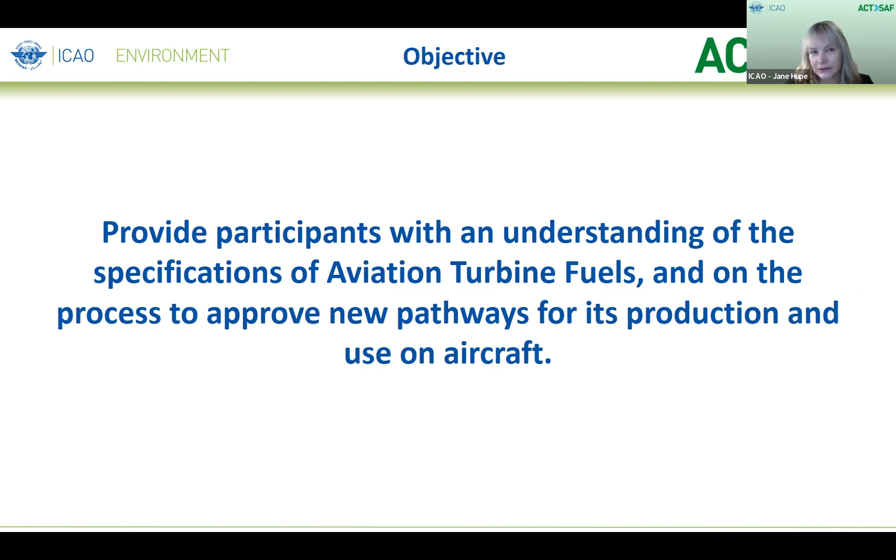Today, we are very pleased to count on the expertise of three ACT-SAF partners: Mr. Ross Walker from Airbus, Mr. Mark Rumizen from the US Federal Aviation Administration, and Mr. Nicolas Jeuland from Safran. They have very kindly volunteered to share their knowledge, expertise, and experience with states as part of the ACT-SAF series. A big thank you for your cooperation.

It is a pleasure, really a pleasure having you here today. I hope you will make full use of this session to ask questions, to clarify matters pertaining to SAF production and certification, and related issues. And we really encourage every participant to make today's training as interactive as possible.

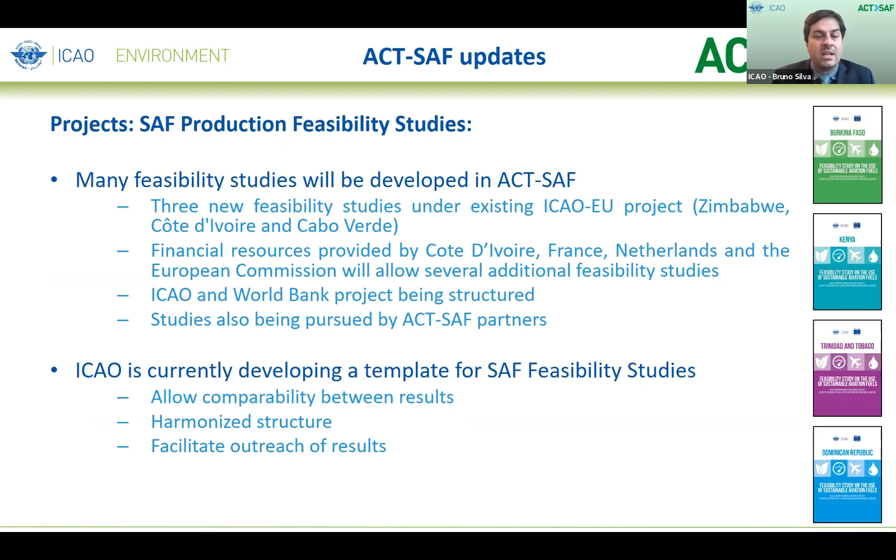So very soon we'll have a lot of feasibility studies coming to be developed and published in the near term. So what we are also doing now is to develop a template for these feasibility studies so that we facilitate the comparability between the results, so we can compare results between different feasibility studies. It will also facilitate the outreach of the results so that people know where to find information on these feasibility studies, and with a harmonized structure this is going to be facilitated.

We also received some feedback that people wanted more details on what will be the projects following the feasibility studies. So we always start with the feasibility study to check if it's feasible to develop a SAF industry in a state. But after that, we're also foreseeing projects to support policy implementation, as there are many policies available to support SAF development.

So here are some categories that we have listed in our ICAO guidance on potential policies and coordinated approaches for the development and deployment of sustainable aviation fuel. And there is this question: what is the best policy for a specific state situation? We will support states to identify the best solution in terms of policy, and also support states to implement a policy framework if that's the case.

Next slide please. Once again, once we've identified the feasibility of SAF production in a state, reminding of the ACT-SAF series where we talked about sustainability: all the elements of a SAF supply chain need to be certified, from the feedstock production from the farms and the distribution of the feedstock, the SAF production plant or refinery, and up to the SAF blending point. Everything needs to be certified under CORSIA standards.

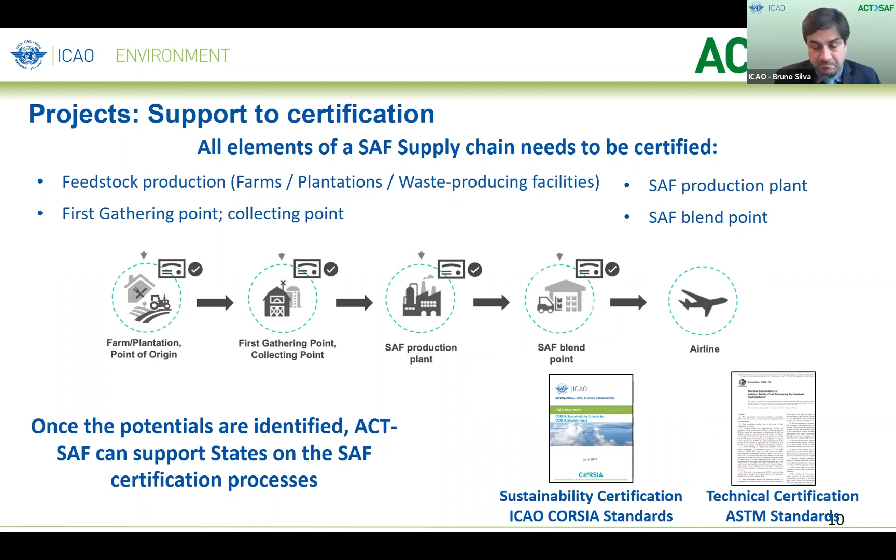Again, a key request we have received since the beginning is the conceptual training on SAF. So on today's session we will talk about SAF production technology and certification. This will complement what we had in the last series, where we talked about sustainability certification. Today we'll really go into the technical certification, how to ensure that the technologies to produce SAF are safe for use in aircraft.

So with that, next slide. I would like to hand over the floor to our first speaker, Mr. Ross Walker from Airbus, who will start on these four first items of the agenda: aviation fuel terms and acronyms, what is aviation turbine fuel, how is aviation turbine fuel produced and controlled, and we'll provide an overview of aviation industry processes for assessing, controlling and approving new feedstocks and processes for aviation turbine fuel production. So Ross, the floor is yours.

Okay, thank you very much, Bruno. I'm Ross Walker, I work for Airbus. I've been working on fuel specifications for about 30 years now, and I will try to impart some of the information I have. Next slide please.

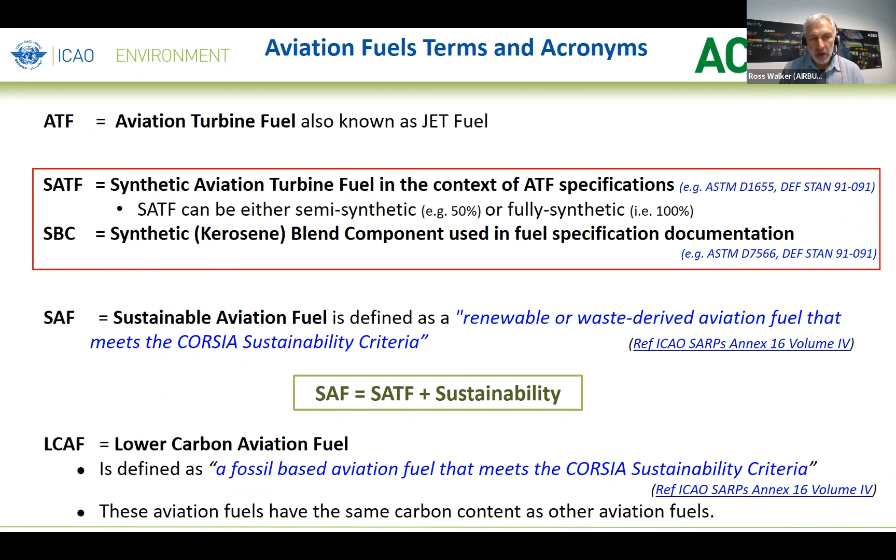SAF is a term that's often used for sustainable aviation fuels, and the sustainable synthetic aviation turbine fuel can be SAF. And in ICAO, you also have the low carbon aviation fuels. My talk today will be about synthetic aviation turbine fuels and how we ensure they are safe for operations for the aircraft. Next slide please.

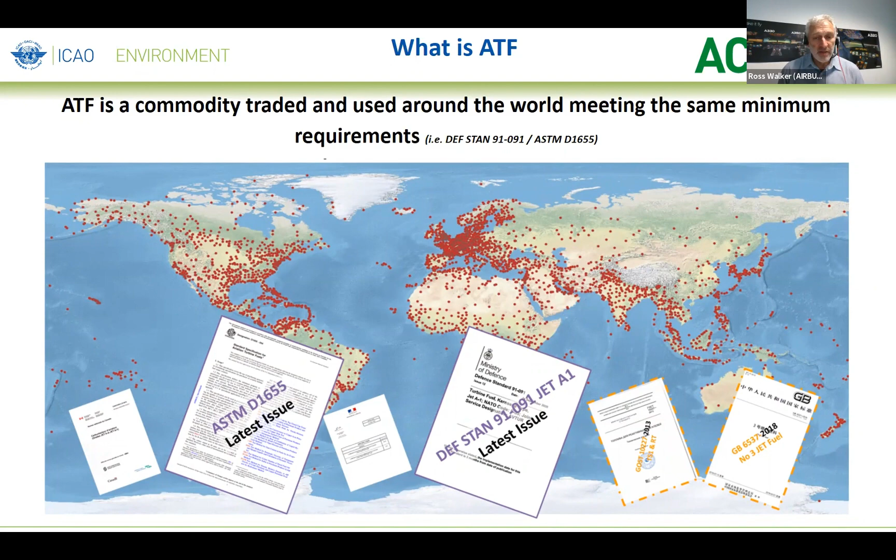So what is ATF? Next slide. So ATF, aviation turbine fuel or jet fuel, is a commodity traded around the world with minimum requirements, and during trading it is basically controlled by two specifications: either ASTM D1655 Jet A fuel and Jet A1 fuel, or DEF STAN 91-091 Jet A1 fuel. These two fuel specifications are the ones which the industry works with, and wherever an aircraft flies around the world it needs to pick up the same fuel. If it picks up a fuel that is different, that can affect the safety and the operation of the aircraft. Next slide please.

Aviation turbine fuel is a hydrocarbon in the C9 to C16 range. It doesn't have a precise chemical composition. It's primarily distilled crude oil, composed of paraffins, naphthenes, and aromatics. I put aromatics in a red box because that's one of the subjects we have to deal with when synthesizing fuels, since not all synthesis means will produce aromatics, and as I'll explain later, they are required for aviation fuels.

On the right, you see a table listing requirements we check for each batch of fuel. But if we go to the next slide, please.

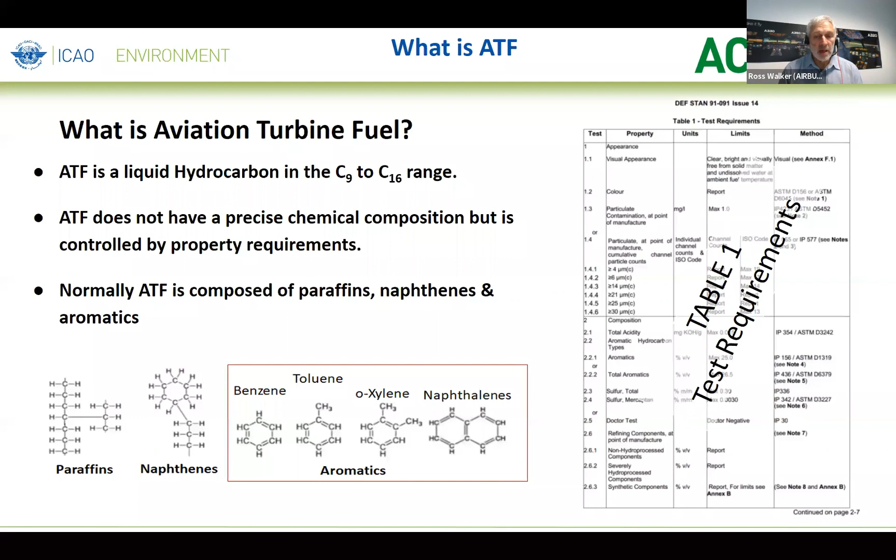The list of properties we check is not everything we require within jet fuel. Many properties, such as specific energy, density, and volatility, are things we can check. But other properties within jet fuel made from petroleum sources are what we call inherent. They are there because it has been produced in a set way for many years, and we know the electrical permittivity of the fuel will be within a certain range, which is critical for fuel gauging. There are other inherent properties important for the safety and security of the aircraft that we don't actually measure, but are there because of the production processes we use.

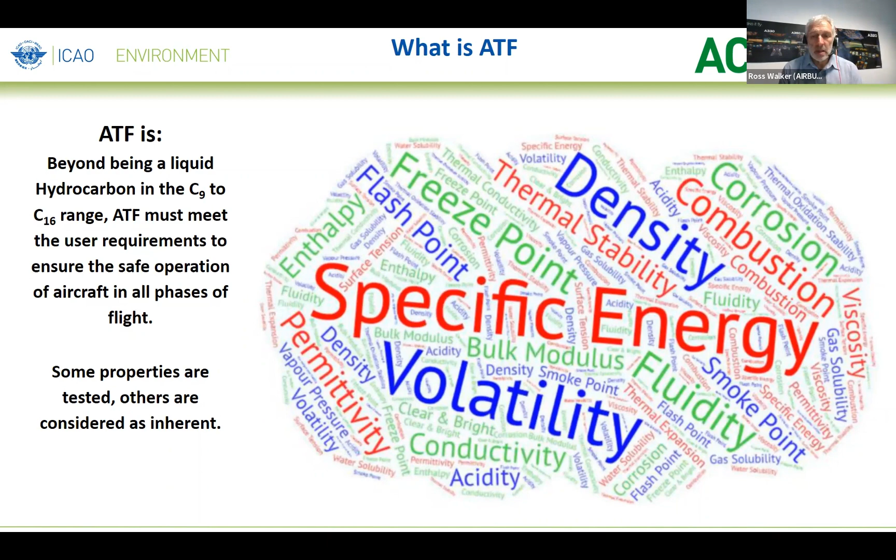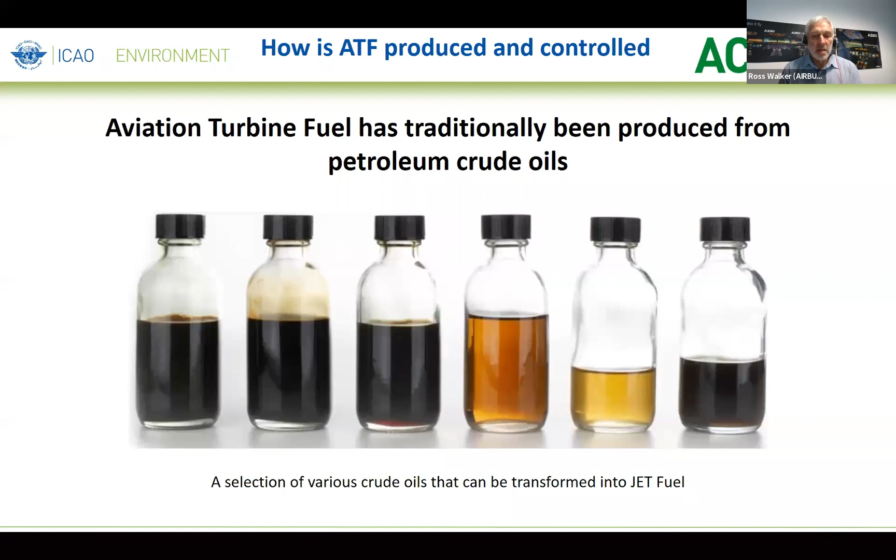Now I'd like to talk about how we produce jet fuels. We all know jet fuel is produced from petroleum and crude oils, but not all crude oils are the same. You can see here visually that these are six different crude oils, and they visually look different. But they all can be used to produce jet fuels.

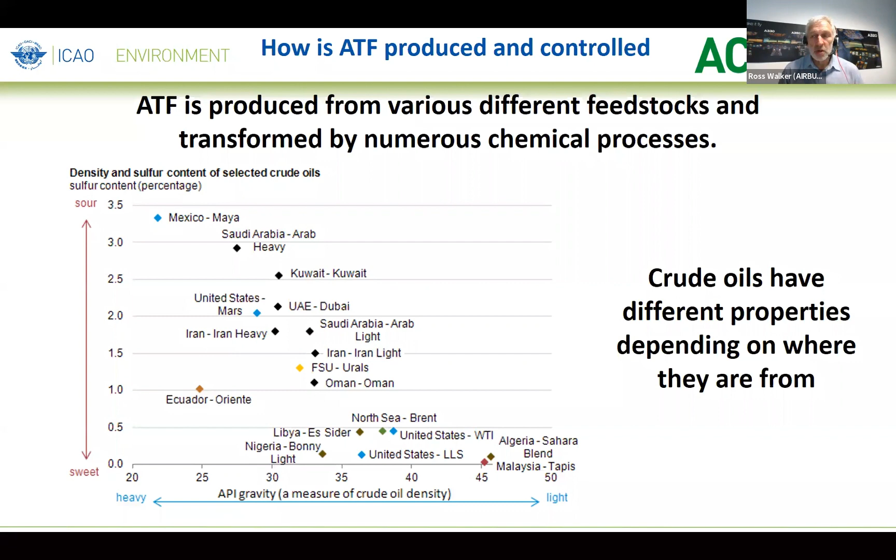So there are lots of different processes used. If we look at the next slide, we can see that if we did a straight distillation - that's just putting the fuel into a distillery, which would heat up the liquids, and the vapors would be taken off at different temperatures depending on the origin of the crude oil, how thick it is, the viscosity, what its sulfur content is - we would get different products out.

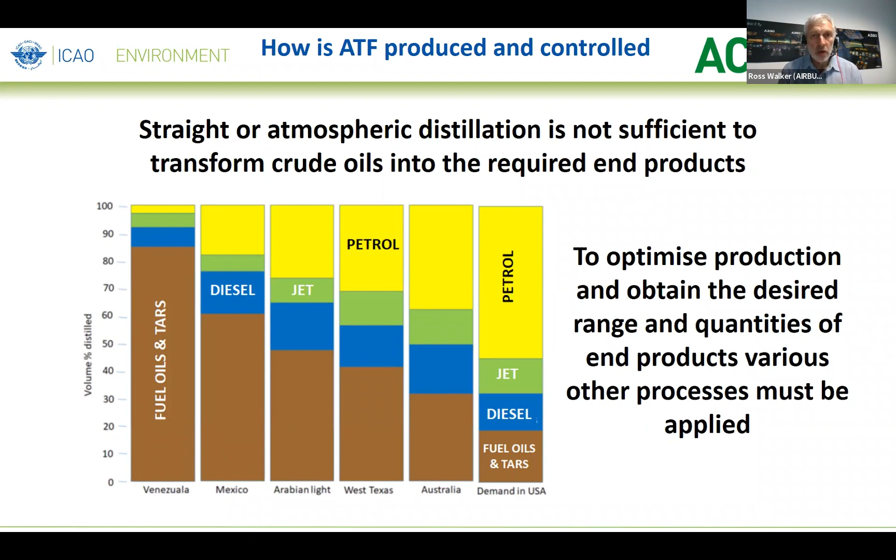So if we go to the next slide, I'm still talking about crude oil, not about fuels which could be substantially sustainable from renewable sources. This is crude oil production, and you can see there are multiple pathways we use to break down different components and reassemble them within the hydrocarbons to make the products we need. I picked out on the right-hand side two aviation fuels, avgas and aviation jet fuel - aviation jet fuel is what we're talking about today. These products can be made by multiple processes, even from petroleum sources.

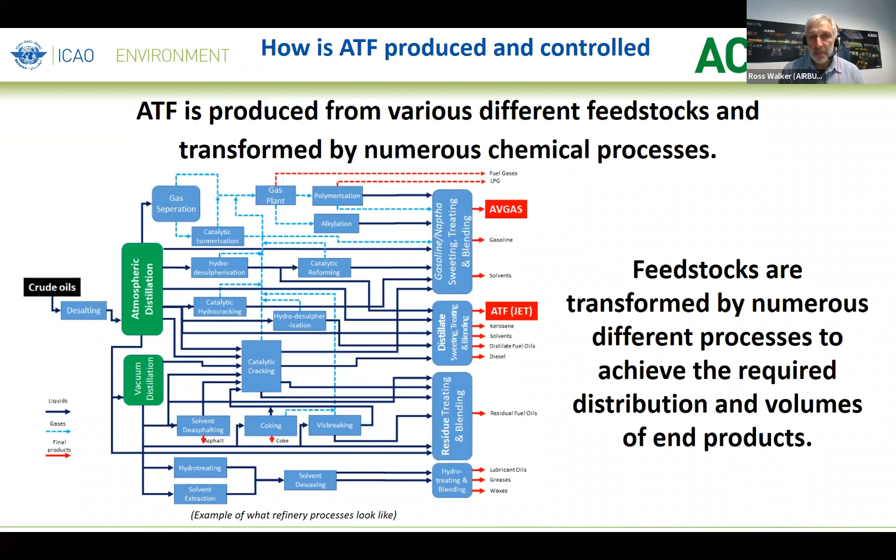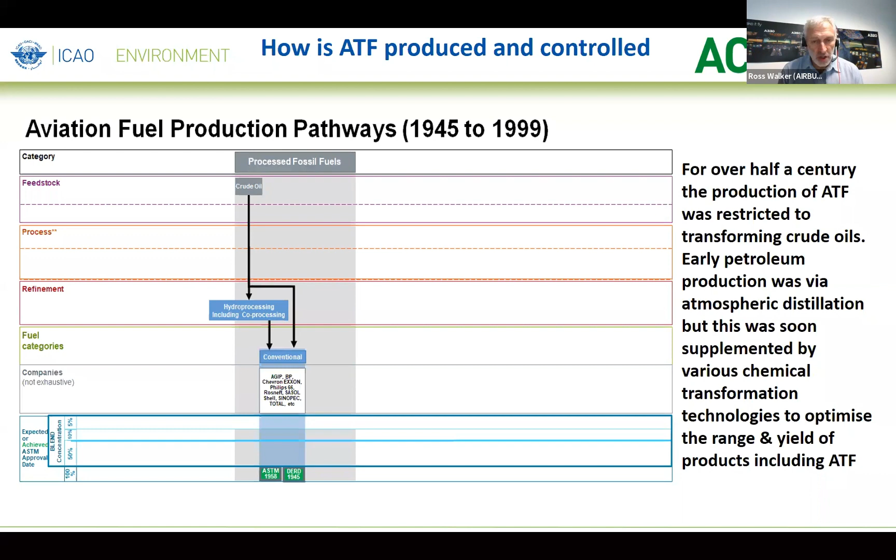So synthesizing fuels is something we have done for a significant period of time and have safely produced jet fuels this way. As I say, we've been producing fuels either by straight distillation or by hydroprocessing - or synthesizing, another way of saying that - since 1945 to 1999, and always using petroleum fuels. In 1999, there was a major change in that we allowed the production of jet fuels from non-petroleum sources. This was done through a process called Fischer-Tropsch.

It took about 5 or 6 years of very intense investigation and study by the producer of the fuel, in collaboration with all the airframers and engine manufacturers, to verify that this new production method was fit for purpose and would not affect the operation of the aircraft.

But the fuel that came out at the end is a jet fuel, a Jet A or Jet A1 fuel. It was limited to a 50% blend with existing petroleum at that time, due to concerns about certain properties, one of those being the aromatics, which is important for the functioning of fuel gauging systems and some of the joints and seals on the aircraft.

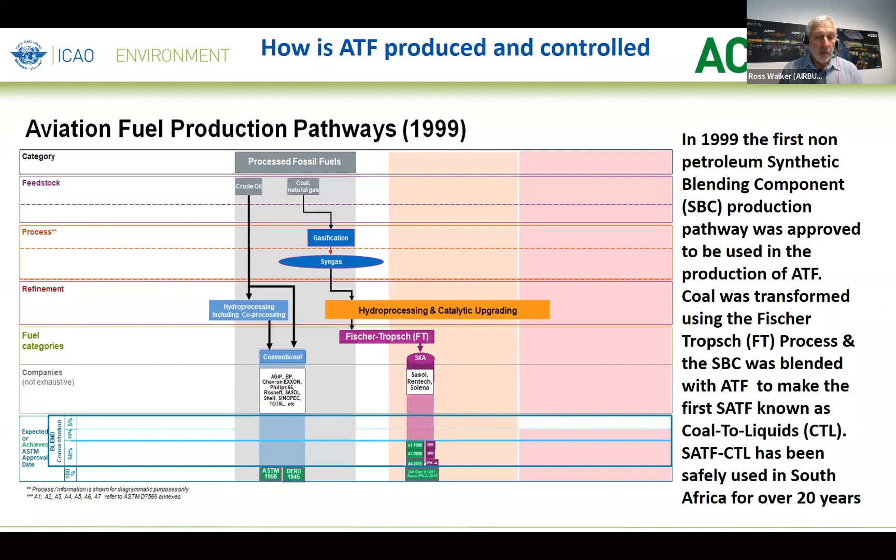When we got to 2009, we'd already approved 100% synthetic fuel using the Fischer-Tropsch process, but it was restricted to one specific refinery in South Africa and was not generally available for producing fuels in that way.

This was a catalyst to us formalizing more precisely the process for approving fuels, a process we call ASTM D4054, and also another means of documenting the approval process. Rather than cluttering up the existing specification with lots of different approvals, we created a brand new specification called ASTM D7566, and within that specification we started putting annexes in.

The first one was the Fischer-Tropsch process, which was expanded beyond production in South Africa to a wider approval that can use various means of production, going from existing fossil sources such as coal or natural gas, but also to renewable biomass, which could be sustainable.

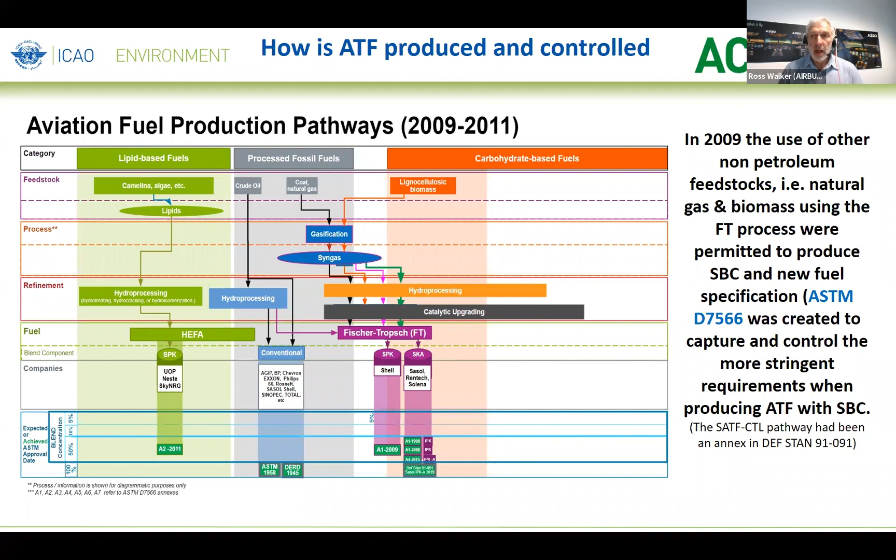In 2011, we approved the second annex, which is a HEFA fuel, hydroprocessed esters and fatty acids, which is probably the one that's been most used. Sometimes used cooking oil is transformed in this way to produce fuels. So in 2011, we'd gone from 2 pathways to 3, and here's where we are today.

I won't talk through all these different processes, but you can see there are multiple different feedstocks we can use, from sugars, starches, vegetable oils, to transform into jet fuel.

Now, all these fuels today that are synthesized from non-petroleum sources require that we blend them. This blending is to ensure we have the correct aromatic content, and also gives us confidence that the final fuel is the same as existing Jet A and Jet A1 fuel. All these fuels are certified as Jet A and Jet A1 fuel based on 2 key specifications, ASTM D1655 and DEF STAN 91-091.

It is important that the final product is a fuel that is listed in the aircraft documentation and certified by the airworthiness authorities as fit for purpose for the aircraft, to ensure the safety of the aircraft and operations. That is the purpose of the specification: safety and operation of the aircraft.

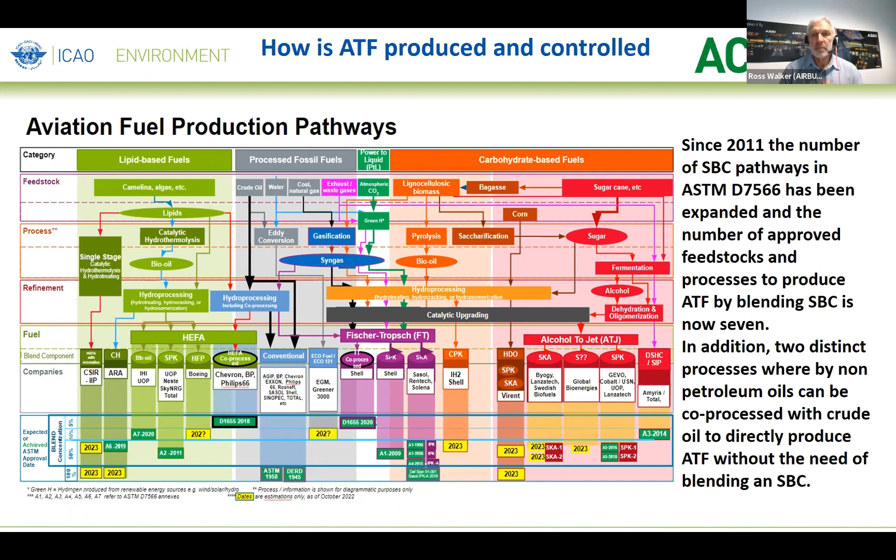If we go to the next slide, this is something you can look at later, or you can go to the actual document, ASTM D7566, which will list the 7 pathways we have now approved for use to produce Jet A and Jet A1 fuel.

There are also 2 other methods to produce fuel, directly within the 2 specifications I mentioned, that allow you to blend non-petroleum oils, such as vegetable oils, with crude oil at the initial point of production. They then go into the normal production process to produce Jet A and Jet A1 fuel without a blending requirement. But normally there is a restriction at present of around 5% of vegetable or non-petroleum oils to make those fuels.

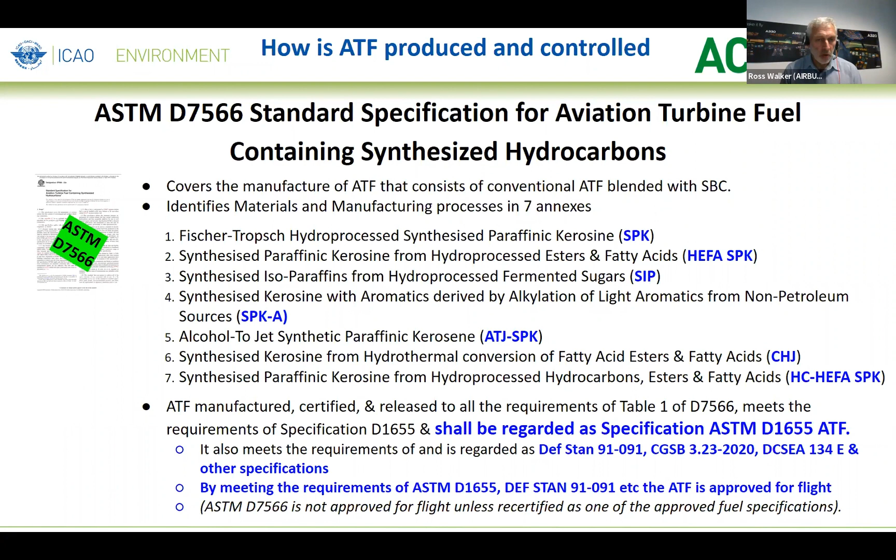If we go to the next slide, this slide is trying to explain what I mean by blending and why we have the requirement for blending. The top wiggly line is showing the hydrocarbon distribution of a Jet A1 fuel produced from a petroleum source, 100% petroleum.

The bottom green line is one of the fuels we use that is derived from vegetable matter and synthesized, a synthesized blend component. We call it a blend component at this time, not a SAF or sustainable aviation fuel, because it's not certified for use on the aircraft.

But if we blend the green line with the blue line, we end up with the red line, and that is a synthetic aviation turbine fuel. If you compare the red line with the blue line, they are very similar, whereas the green line has a significant difference to the blue line. One of those key components, as I mentioned, is the aromatics. Aromatics are something we've always controlled in jet fuel.

We've always limited what the maximum level of jet aromatics is within jet fuel. But we know that because it's inherent within jet fuel production from petroleum sources, we've never had to put a minimum value in. But when we produce fuels from synthetic processes, not all processes produce aromatics. Therefore, we've had to put in place a requirement that there is a minimum aromatic content within jet fuels made from non-petroleum sources. This is a key criteria that limits how much we can actually use sustainable or synthetic feedstocks to produce jet fuel. The actual blending ratios are specified in the ASTM D7566 document because they will vary depending on which feedstock and which process you are using to produce the fuels.

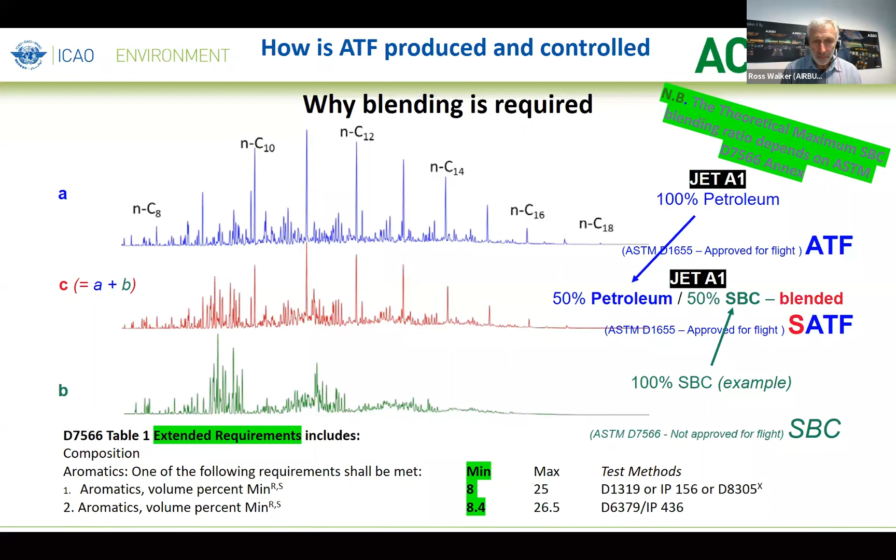If we go to the next slide, I'll give you an overview of where we are today. So what I was talking about is how we produce normal petroleum-derived fuels through varied processes. We actually break down and synthesize much of the petroleum jet fuel that we have today. But when we go to synthesizing fuels from non-petroleum sources, we have to have a very clear and precise process, ASTM D4054. Mark Rumizen, in the next part of this presentation, will explain clearly what that process is, who's involved, and how we achieve certification through that process.

A second document I mentioned was the D7566. This is a document which allows us to categorize and define precisely each process in the form of annexes within this document. As I said, there are 7 annexes, allowing 7 different pathways which enable you to produce potentially not just synthetic fuels, but synthetic fuels that could be sustainable. But neither of these documents are approved for flight.

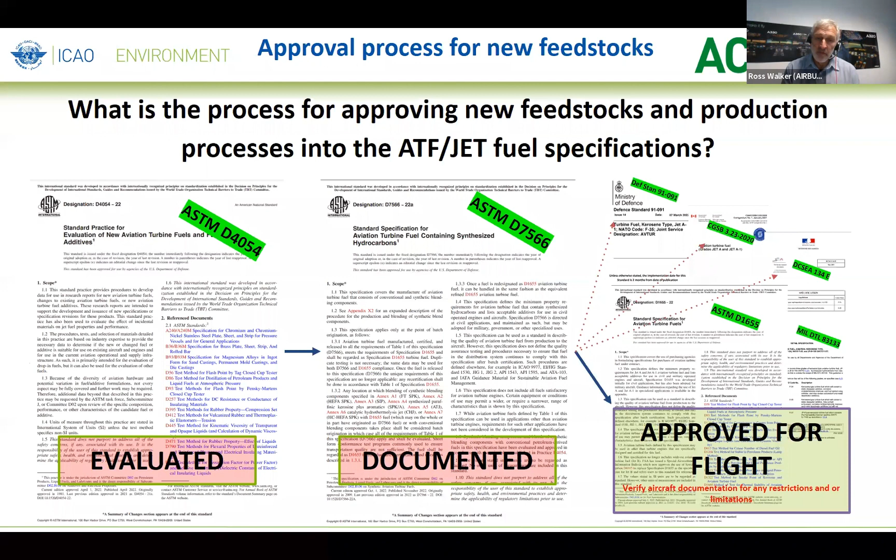The D7566 fuel needs to be recertified as either ASTM D1655 or DEFSTAN 91091, which are listed in aircraft flight documentation, not just for Airbus, but for other aircraft producers such as Boeing, Bombardier, Embraer. Only at this point is it approved for flight, and it's based purely on the safety requirements for the aircraft that approval is given. So that was a very rapid explanation of what jet fuel is, how we synthesize, or the options we have for synthesizing jet fuel from non-petroleum sources, which could potentially be sustainable. I think now Mark Rumizen will explain later more precisely the 2 documents there in red, the 4054 and 7566 documents. If you have any questions, I'm open to take them.

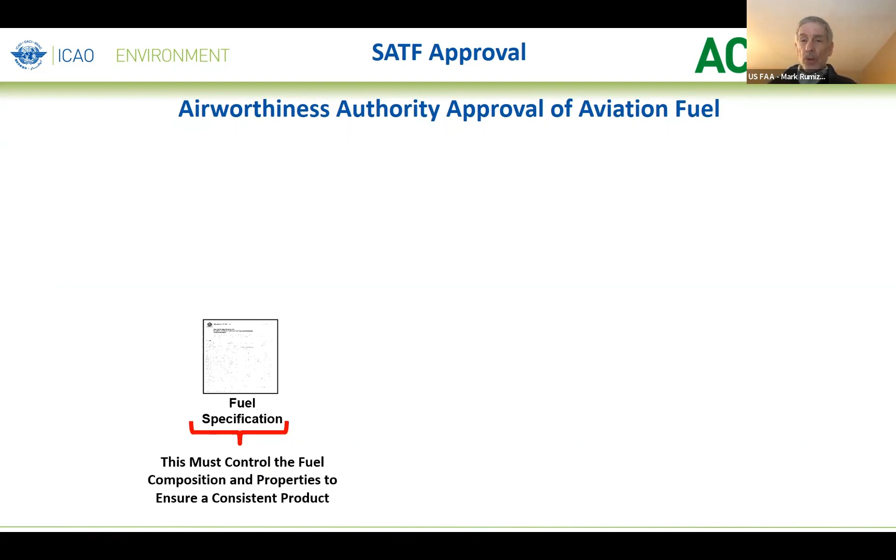Next slide, please. So the way we control fuel, and this is very important, is by a fuel specification, which are typically industry documents. They're also military documents. But there are different specifications, and they're all controlling what we call Jet A or Jet A1 fuel. It's the same fuel. So we control fuel with a fuel specification.

The aircraft engine companies, such as Pratt & Whitney, Rolls-Royce, or GE, include the fuel definition or fuel specification as an operating limitation. And then that operating limitation flows up to the aircraft operating limitations.

So as part of the aircraft design, there's a limitation that says you must use Jet A or Jet A1 fuel in very simple terms. It may define properties or the specification, but really all it says is you must use Jet A or Jet A1 fuel. This is done during certification of the engine and aircraft.

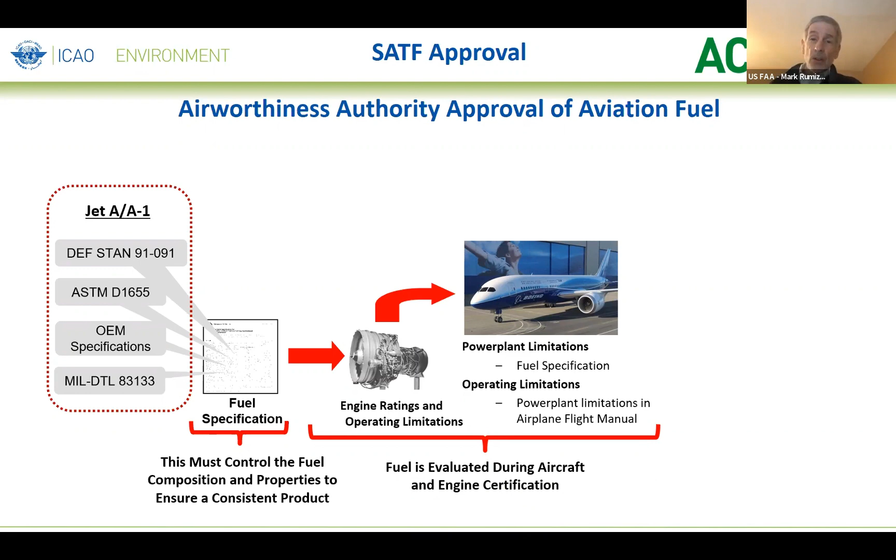And then you send the aircraft out to airlines. The airlines, in accordance with regulations from EASA, Transport Canada, and the FAA, can only use the fuel that the airplane and engine manufacturers say they must use. That's called an operating limitation.

So what this means, if you look at this whole picture, is that the airworthiness authorities — FAA, EASA, Transport Canada, ANAC in Brazil, JCAB in Japan — we don't certify fuel as a product. We don't certify fuel as a part of the airplane. We certify airplanes and engines to operate on a specified fuel. And that's very important. That drives a lot of things I'm going to talk about in the next couple slides.

It's important to note that the airline is where the airworthiness authorities apply their regulatory oversight. They go to the airline and say, are you sure you're only using the fuel that Airbus or Boeing says you're supposed to use? But nothing upstream of that, where the fuel is made, how it's handled, quality checks — none of that is under the oversight of the aviation regulatory authorities. Again, something that is very difficult to understand.

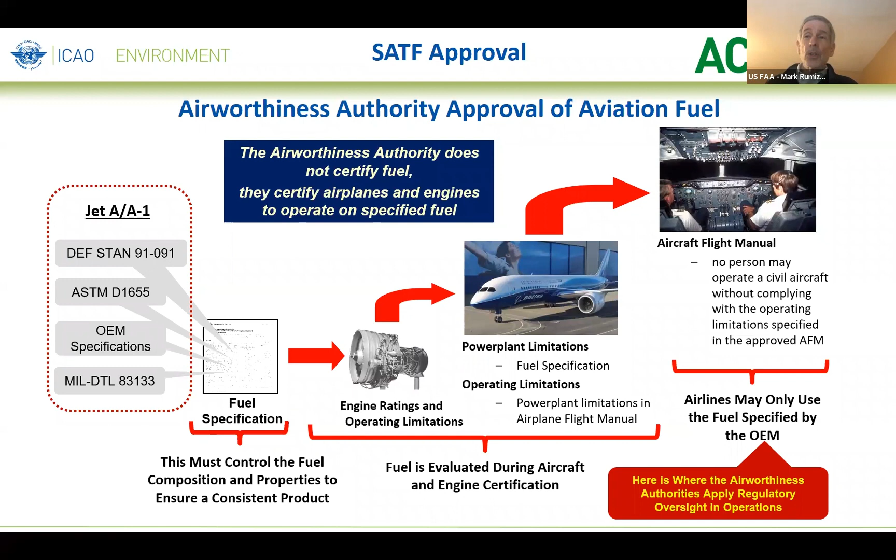So this all ties into how we approve these fuels. Ross already gave you the definition for SATF, synthetic aviation turbine fuels. Notice I'm not using SAF here — I'm saying SATF because not all SATFs are SAFs, but all SAFs are SATF.

Anyway, so we start off with block one. As I just talked about, all the airplanes are approved to operate on Jet A fuel or Jet A1 fuel. That's their operating limitation. But they're all approved to operate on the same fuel.

So what we did when we were trying to figure out a way to evaluate SAFs or SATFs, we developed a process defined by an ASTM standard, D4054. That's our evaluation process. It tells you what tests you need to conduct, with a lot of other information in it.

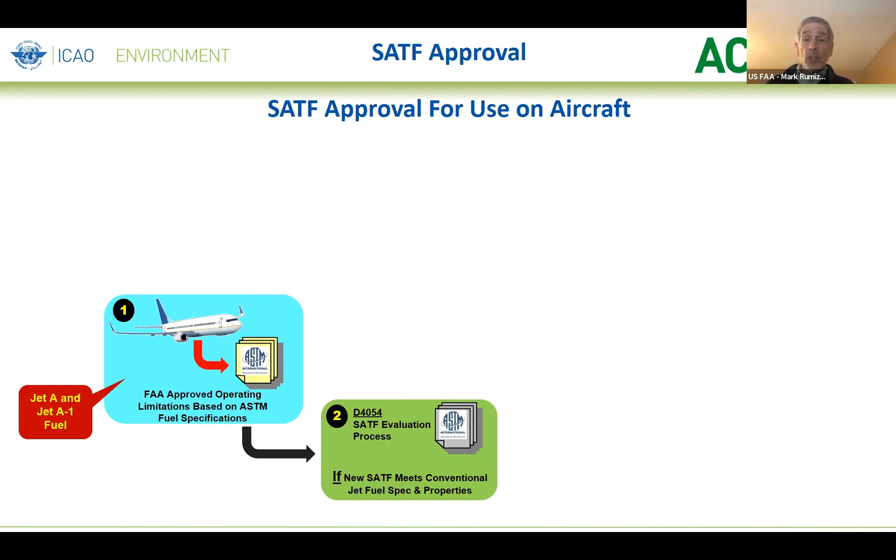And really all that document is trying to do is compare the fuel made from, let's say, renewable resources like sugar or vegetable oils, to see whether or not that fuel is essentially identical to jet fuel made from petroleum. That's what that process is trying to do.

And if the determination or conclusion is — and this is done with the aircraft and engine manufacturers, it's a very rigorous process, I'll explain that in the next slide — but if a determination is made by the aviation fuel community in general, all the stakeholders, that yes, it is the same fuel, then we add it to our drop-in fuel specification, which is ASTM D7566.

And as Ross mentioned, we add these as annexes because right now we require blending with conventional jet fuel to get a complete jet fuel. These are subsets of jet fuel for the most part, and I'll explain that again later.

Yeah, okay, good, my timer's going. Next, please.

And what we call the fuel products defined in the annexes, we call them synthetic blend components, SBCs. I think Ross also mentioned that. Thank you, Ross.

And then you blend it. I just talked about this — that's how you make SATF.

Ross also mentioned how many years he's worked in aviation fuel, and you notice I skipped that part. I don't want to admit that part, but I'll just say it's almost as long as Ross. So I know almost as much as he does.

So moving from block 3 to block 4 — since we've already proven the fuel is Jet A fuel, it's just Jet A fuel. It's determined it's equivalent to the conventional jet fuel specification, because it's equivalent, and there's wording in both specs to sort of lock that in.

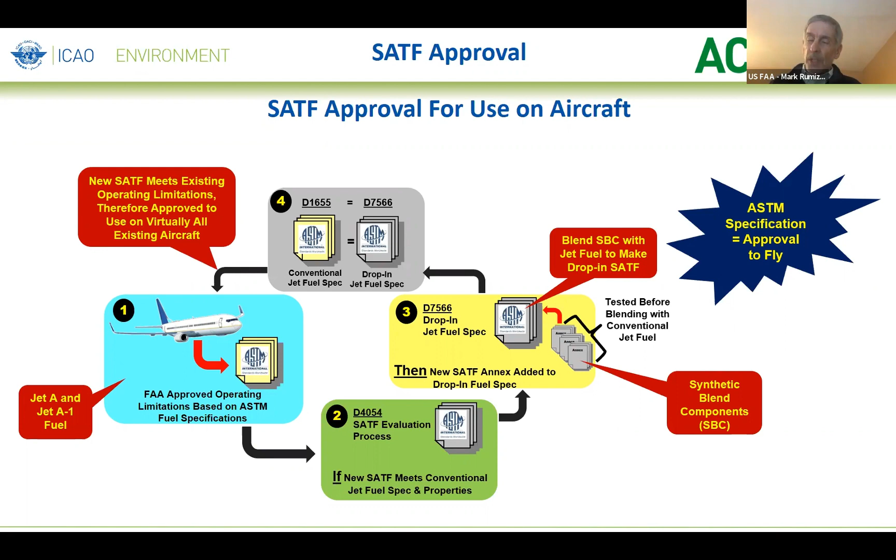But that's it — that's why you hear so many companies talk about getting ASTM approval. It's not really ASTM approval. It's really getting their own ASTM specification annex.

So let's focus on the evaluation process, because that's really the heart of this whole process I talked about, the D4054 evaluation process.

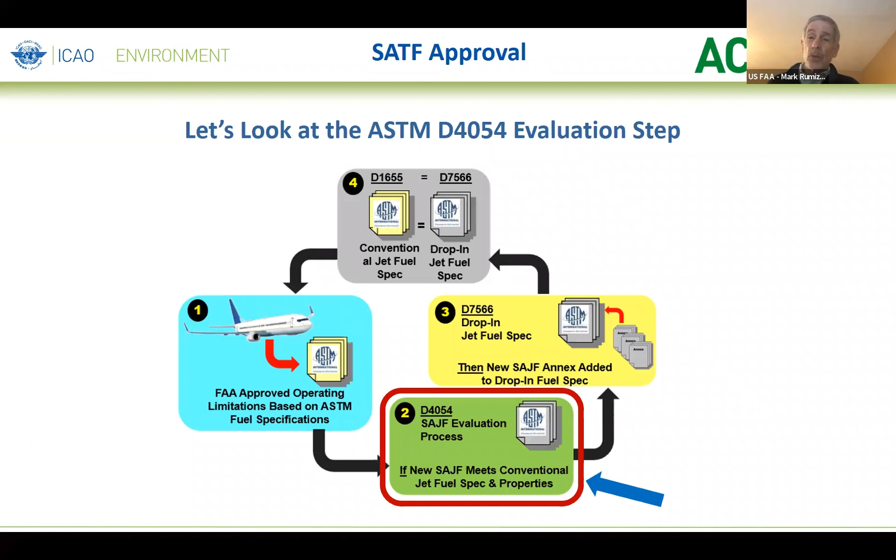So what this process does in very simple terms, it's working backwards. It's trying to determine if the new fuel, and it's not really new fuel but I use that term here, fits the existing fleet of engines and airplanes. I used to work for two engine manufacturers, so I always tend to forget the airplane, excuse me for this slide, sorry Ross. But this really applies to airplanes as much as engines. The idea is to make the fuel fit the airplane.

And if it does, we call that a drop-in fuel. So you don't need to make any changes to the airplanes or engines. You need to put a lot of work into making the fuel and getting it right, but once you do that, you can just use it on the existing fleet of airplanes all over the world - Embraer airplanes, de Havilland airplanes, Airbus airplanes, Airbus helicopters.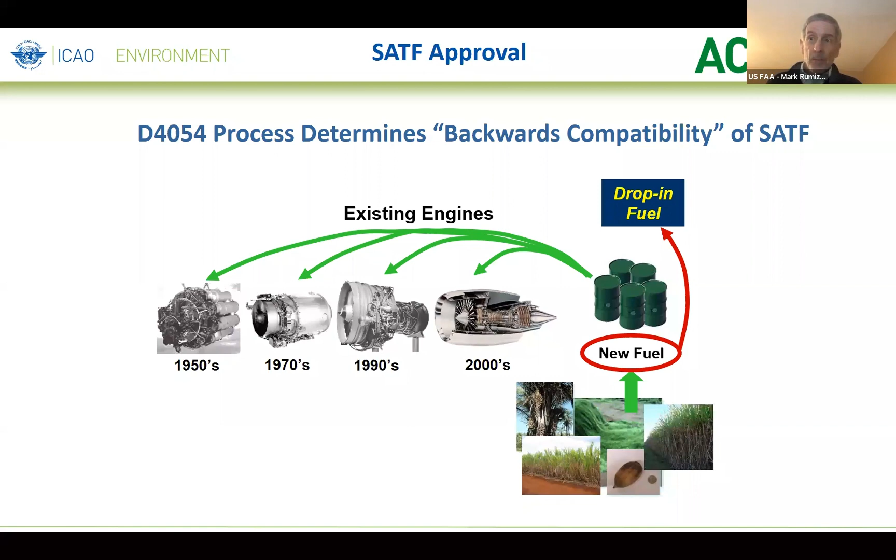So here's the evaluation process. The first part of it is an evaluation of fuel properties. And then a report gets issued. And then there's a collective review of the data. This is a very rigorous review, trust me.

A team of engine and aircraft manufacturers, which has grown considerably in the last couple of years because of the interest in SAF, and myself as part of the FAA - EASA sometimes participates, Transport Canada might get involved - we review the data. We make sure, first we determine, does this look like a Jet A fuel? And then secondly, we determine, is there any additional testing required, just to double check things we might not be sure about.

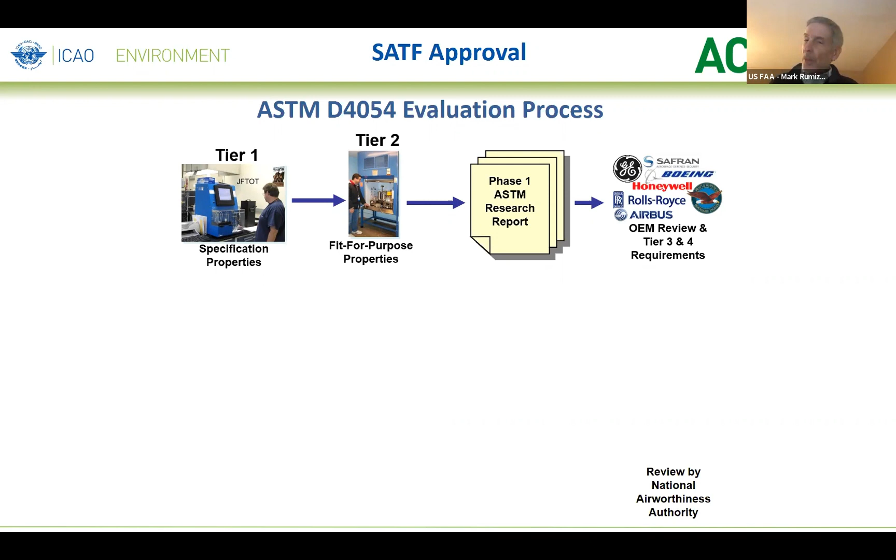And if there is additional testing required, then we get into more expensive testing that requires a lot more fuel - combustor rig testing, engine testing, fuel nozzle rig testing. These are more expensive tests, but they have been necessary in some cases, and they provide important data.

And we go through another similar final review. And then finally, when the national airworthiness authorities involved agree, and the engine and aircraft manufacturers all agree, they give it a thumbs up. Then we say, okay, this looks like a jet fuel, this will be safe on our products. That's the important thing.

Then it finally goes to a balloting process at ASTM, where the rest of the aviation fuel industry stakeholders get to review the data. There are handlers of fuel, pipeline companies, companies that make ground filtration systems which you may all be aware of. There's a lot of people that support maintaining the quality, handling, and distribution of fuel that should look at the data in case there's something about the fuel that we missed that's important in their area.

And if everybody finally determines the fuel is essentially Jet A fuel, it's no different, it's going to perform the same, it gets added to our drop-in fuel spec.

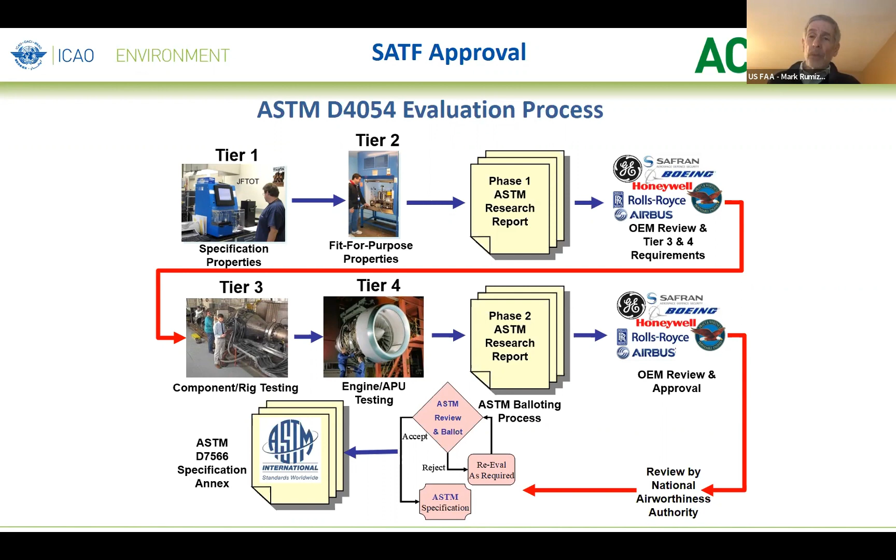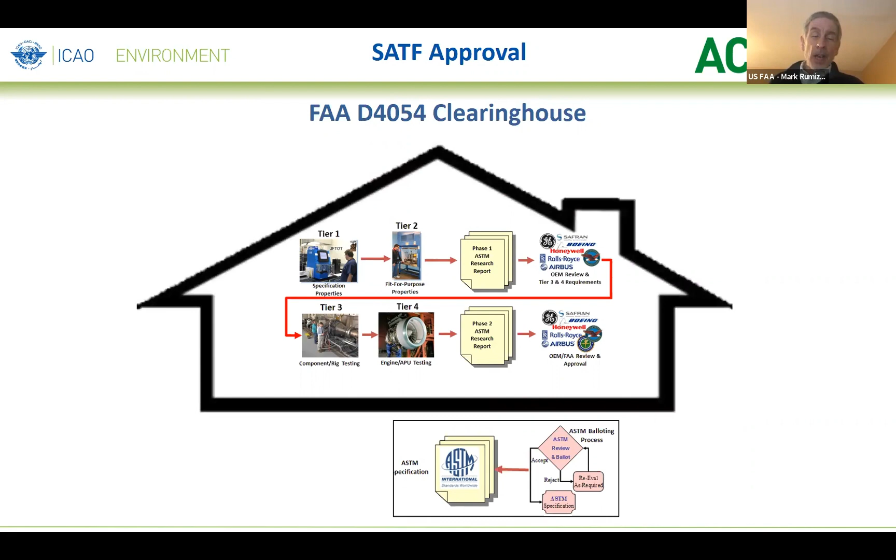So the FAA has created kind of a virtual clearinghouse. Think of it as a black box. It's a group of us that coordinate, manage, and conduct the evaluation process to help these companies, which in many cases are new ventures, not very well capitalized companies, to help them get through the process.

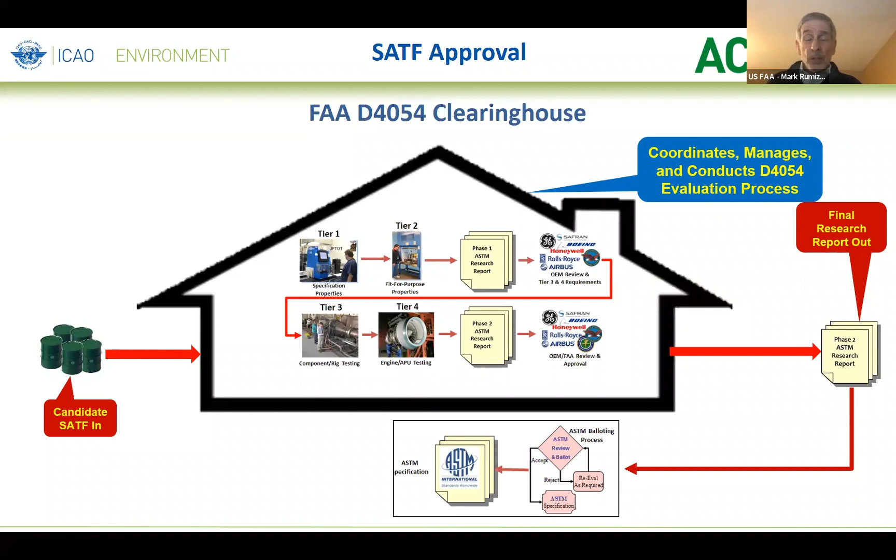So the idea is that the company delivers us a minimum amount of fuel, 50 to 100 gallons, and then we coordinate it. And out the other end comes that research report that I talked about on the previous slide. So it facilitates the process, it subsidizes it. The FAA provides funding to help with the testing and help the OEMs, the engine and aircraft manufacturers, review all the data. So again, it just facilitates the process and makes it easier for these companies to get through it.

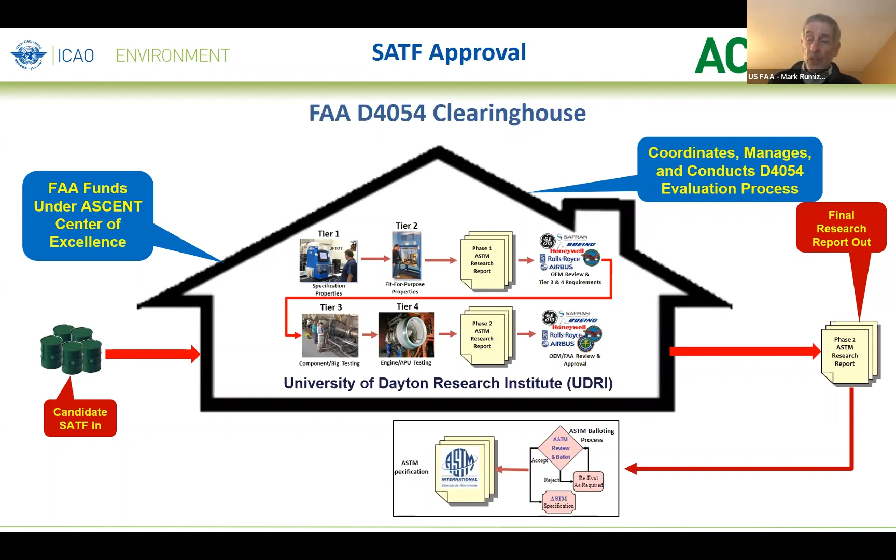So using the process and concepts I just talked about, what have we accomplished over the years? It started with CAAFI, the Commercial Aviation Alternative Fuel Initiative. You should all go look at that website - there's a lot of good information on SAF and SATF. It started as a coalition to get the industry players together to figure out how to go down this road.

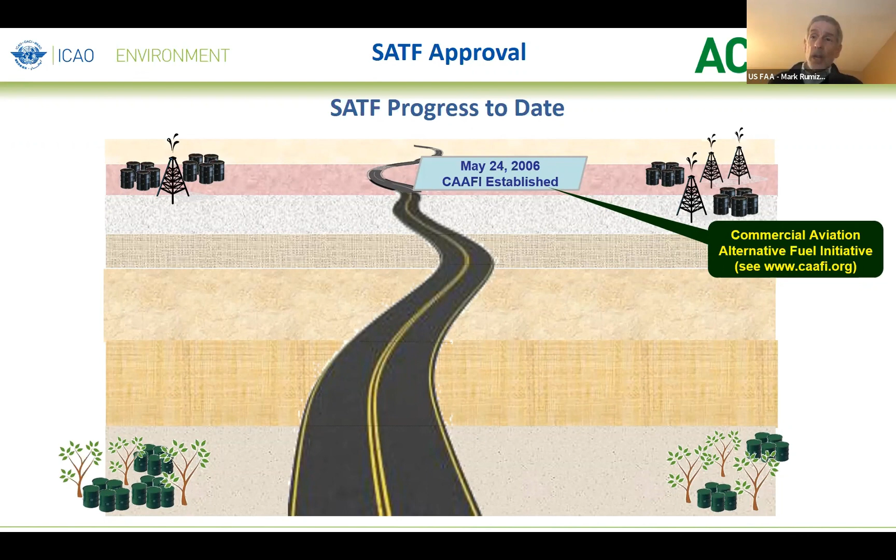We issued the drop-in fuel spec in 2009. That had the first annex in it - Fischer-Tropsch, which Ross talked about. We decided to work on that first because there had been a lot of work done before that. It's a long story, I'm not going to get into it, but that was our first annex, our first drop-in fuel.

And ironically, most of the experience with that fuel is fuel made from coal, which is not a SAF - coal is not sustainable. But back then in 2006, 2009, there was a lot of interest in supply security and concern with petroleum reserves running out, more so than environmental concern, interestingly enough. That's kind of how this all started. But Fischer-Tropsch, for full disclosure, can also be made from renewable products, and there are companies working on that right now.

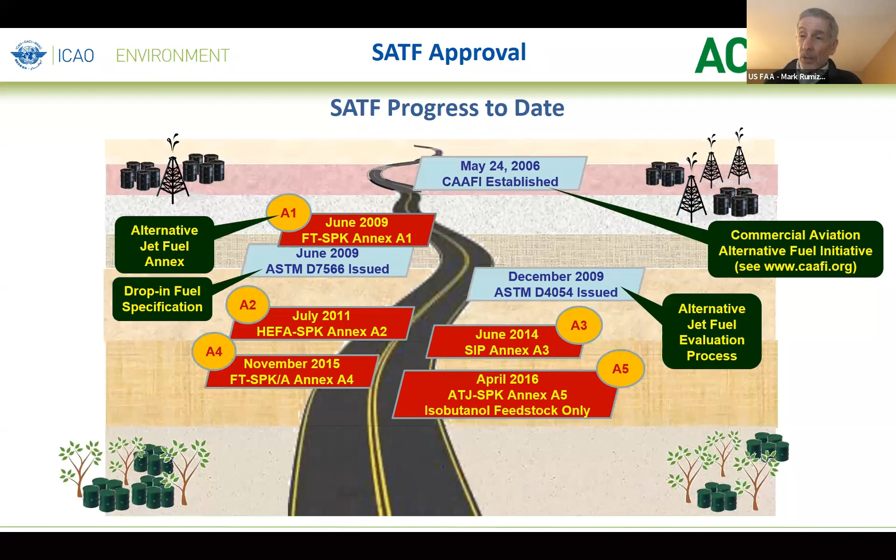We worked all the companies involved in the fuels through these annexes - we worked them through the wringer, as we say in the United States. They had to provide a lot of data. So we've accomplished a lot.

We've issued 7 different annexes. There are varying percentages of blends, either 50 or 10%. The fuels are made from different feedstocks, with different conversion processes. There was a lot of data for all these, a lot of work put in. And again, I assure you that safety was the paramount concern.

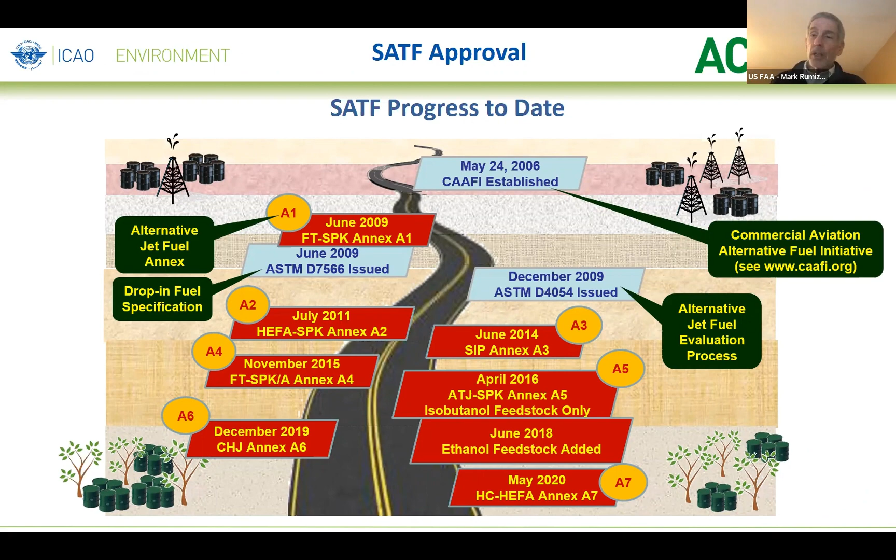These fuels produced by these conversion processes are Jet A fuel - the same Jet A fuel you see pumped into your airplane when you're waiting by the gate getting ready to take off. It's the same fuel.

Okay, so let's talk about a question we had. Everybody's interested in 100% SAF. So let's talk about how we get there.

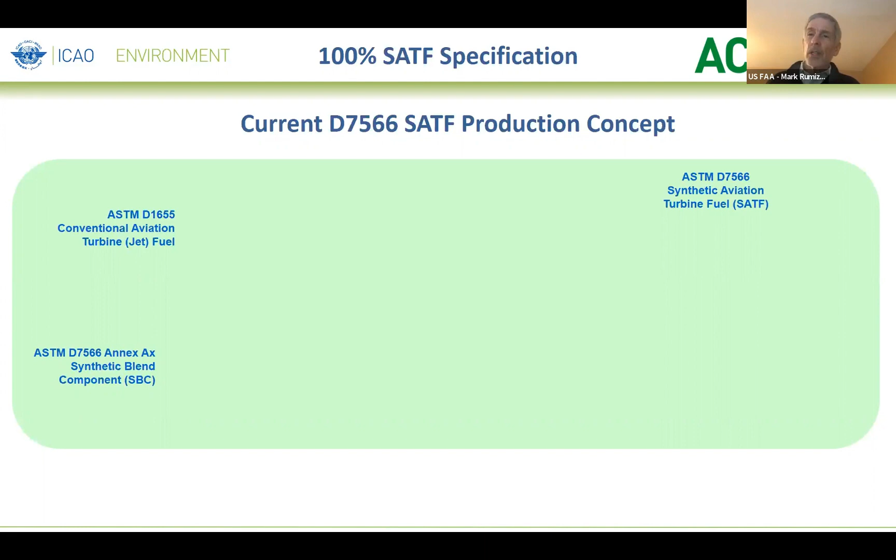First we need to understand this concept of blending - Ross mentioned it, I've mentioned it. So how do we do it now with the existing annexes? First you have conventional jet fuel made to the conventional jet fuel specification. That's being done everywhere.

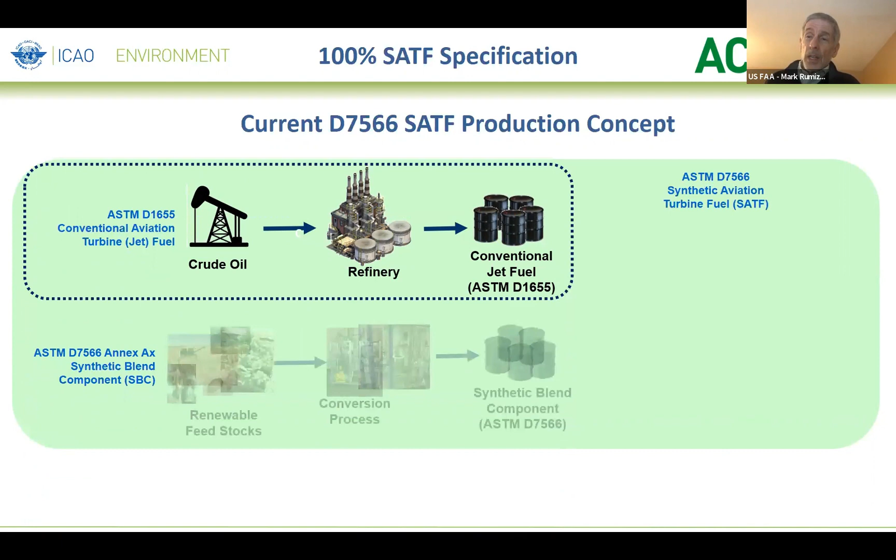Then you have to make the synthetic blending component - that's done in a completely separate process stream. So now you have a synthetic blending component on one hand, and conventional jet fuel on the other.

This is like that Reese's peanut butter cup commercial where the two trucks crash together, one has chocolate, one has peanut butter, and they put them together to make Reese's peanut butter cups. Then you blend them, and that produces what we call SATF, synthetic aviation turbine fuel. You can blend up to 50%.

That's the blending step, covered in the drop-in fuel spec, as well as the production of the synthetic blending component, also covered in the drop-in fuel spec. The production of the conventional fuel is covered by current conventional fuel specs. So now you understand that they need to be blended right now, and I'm going to talk a little about why - Ross also touched on that.

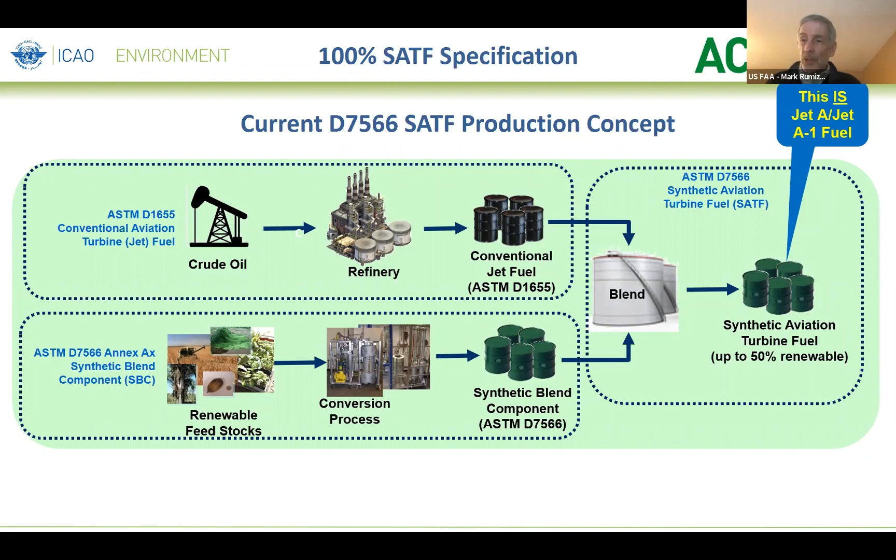And as I've said many times, it is Jet A fuel. It's important to understand that it's the same fuel - tastes the same, smells the same, looks the same. So we need to look at the composition. Again, Ross talked about that a little.

The composition of jet fuel is made up of different hydrocarbon compound classes. They have different structures, but they're all made of hydrogen and carbon, and that's what fuel is made from. These different structures and sizes contribute to the properties of jet fuel, which are important to make it work properly in the engine and in the airplane.

So you have that whole formulation. Now let's look at the first annex. Think of the full formulation as a pizza. The first annex, Fischer-Tropsch, is missing one of the slices of the pizza. Ross talked about it - it's missing aromatics, which is a unique type of hydrocarbon molecule.

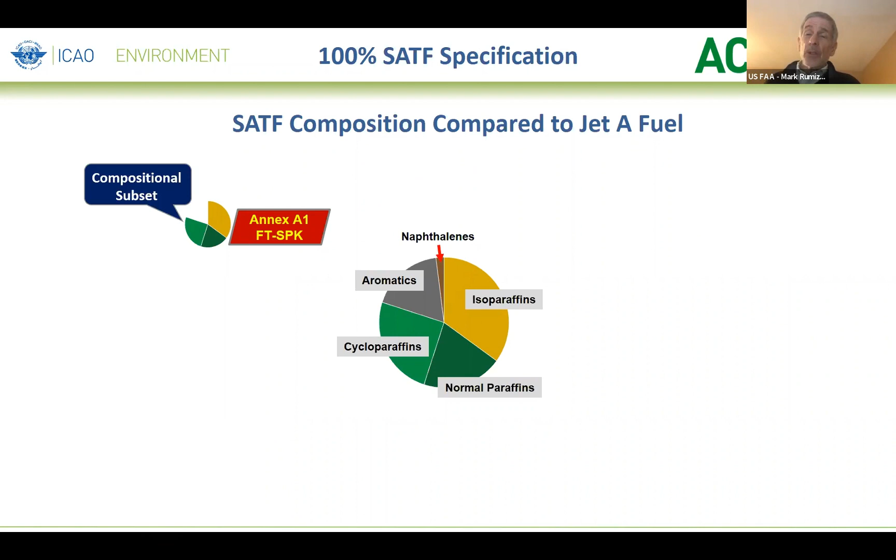So think of it as a compositional subset of jet fuel. It's not the complete jet fuel, but it's a piece of it. HEFA is the same exact thing. Now SIP, synthesized isoparaffins, notice that's just a small pizza slice - not almost the whole pizza. The whole rest of the pizza is missing. You only have one slice there, the isoparaffins.

So that's only limited to 10% blending. You're going to figure out as I talk how we come up with the blending percentages. The first two, you can blend up to 50% because it's easier to just fill in that one slice of pizza. The third one, you can only blend at 10% because you need a lot more slices of pizza to complete the jet fuel formulation.

Annex A4, this one's different - this is what we call a fully formulated jet fuel. It's the whole pizza. So why do we only approve it at 50%? Why does it have to be blended? The reason is we want to be conservative. We don't want to let an airplane fly across the Pacific or Atlantic on 100% SAF until we get more experience. So right now there's a limit - you can only use up to 50% blended with conventional jet fuel.

Annex A5, same thing, missing the aromatic slice of the pizza. Annex A6, here we have another fully formulated one. Same thing applies - we only limit it to 50% because we want to be conservative and make sure we're safe.

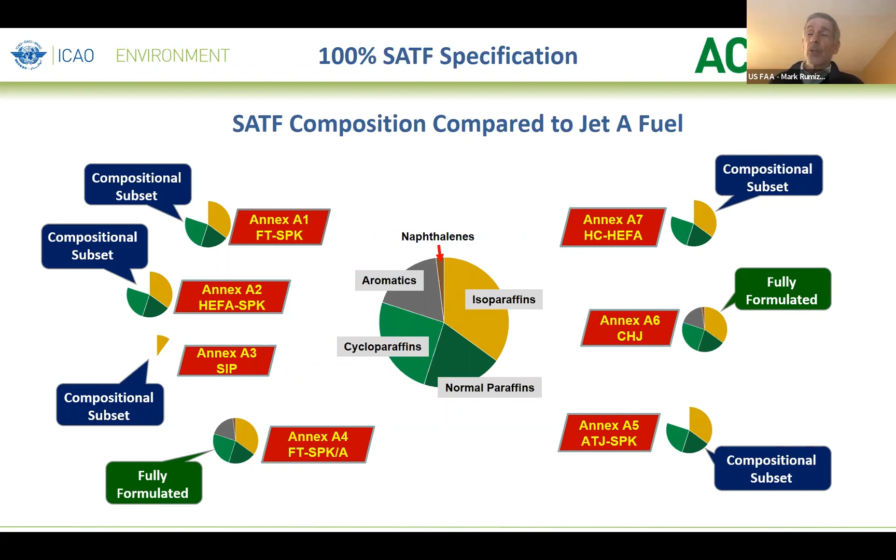So how do we approve, how do we put in place a specification for 100% SAF? There are three ways, and this follows what I just talked about. First, you blend one of those compositional subset annexes with a fully formulated annex.

The second approach is to blend one of the compositional subsets with a different compositional subset annex. We don't have an annex that makes just an aromatic blending stream, but it's in process - there's a company called Virent working on it. They're close to approval but it hasn't been approved yet. When they're approved, they will be that gray slice of pizza, allowing blending with HEFA or Fischer-Tropsch to make your fully formulated SAF, your complete pizza.

I hope pizza is a global product - hopefully, but I believe it is. I think everybody in the world has tried pizza.

The third approach is to allow use of one of those fully formulated annexes, with the addition of additional properties. I'm not going to get into that, but we would need to add some additional properties to the specification and allow use of that without having to blend with anything else.

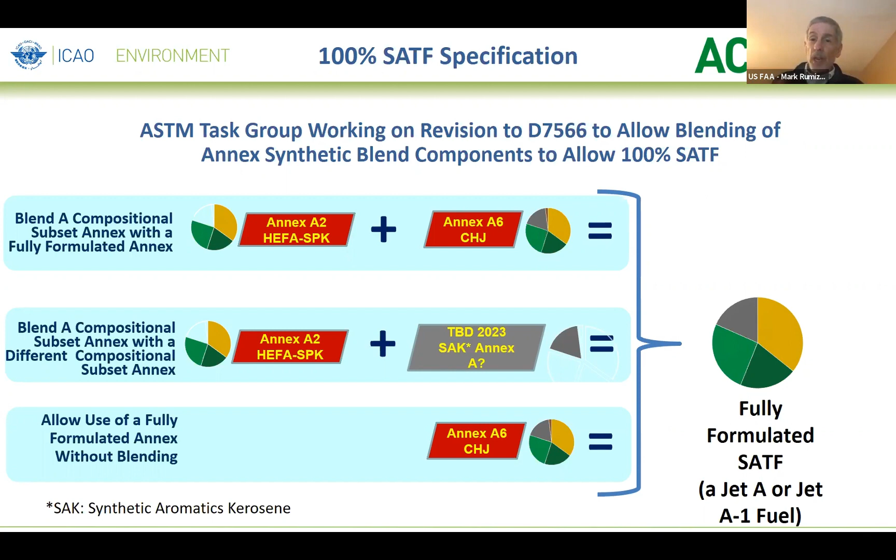I want everybody to know we're working on this at ASTM. We put a lot of work into structuring, revising and coming up with the wording in the specification, which is very important because the specification controls the fuel from where it's made at the refinery all the way through the supply chain to the wing of the airplane. So it's very important we get it right. We've got it kind of written, now we have to see how much data we need and review with ASTM and go through the whole process. But we're working on it.

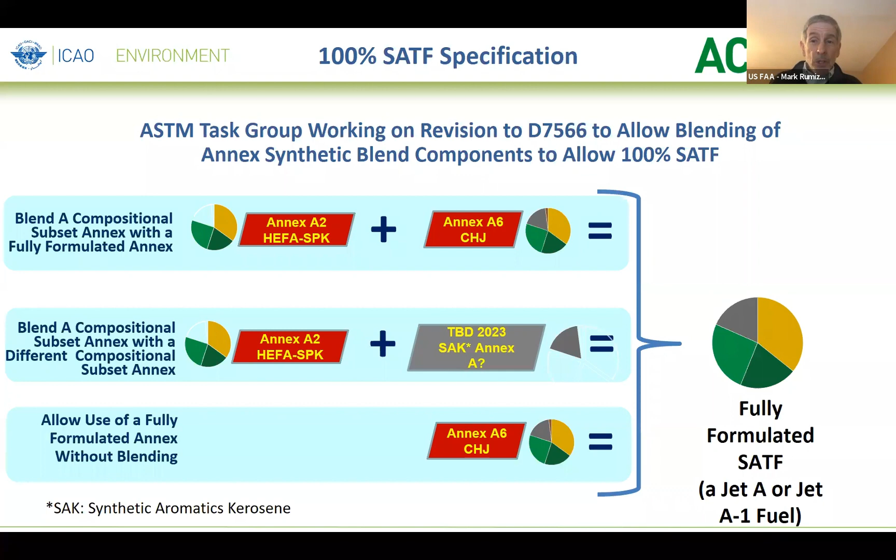To sum it up, we know how to do it. We just have to get it into the specification, and we're working on that.

Co-processing. Again, there were questions on this. Ross touched on it.

Let's take a look. Here's the blending scheme I showed you, how we do it now with the drop-in fuel spec D7566. And remember, everything I'm talking about here, the fully formulated jet fuel, anything that we approve, and this is very important, is Jet A fuel.

You don't need to do anything to the existing fleet of thousands of airplanes out there, helicopters with jet turboshafts, little turboprops like Cessna Caravans, big airliners like Airbus A380s or A350s or Boeing airplanes. You don't need to do anything. This is the same fuel.

And because of that slide I put up with the four boxes about the approval process, you don't need to approve the airplanes to run on it once we get done and put it in the specification. No additional approval required. So effectively, right now, all airplanes are approved to operate on 100% SAF if we get it in the specification the way I just talked about, doing everything I've talked about in this presentation. It's no different. It's nothing special once we're done with the approval process.

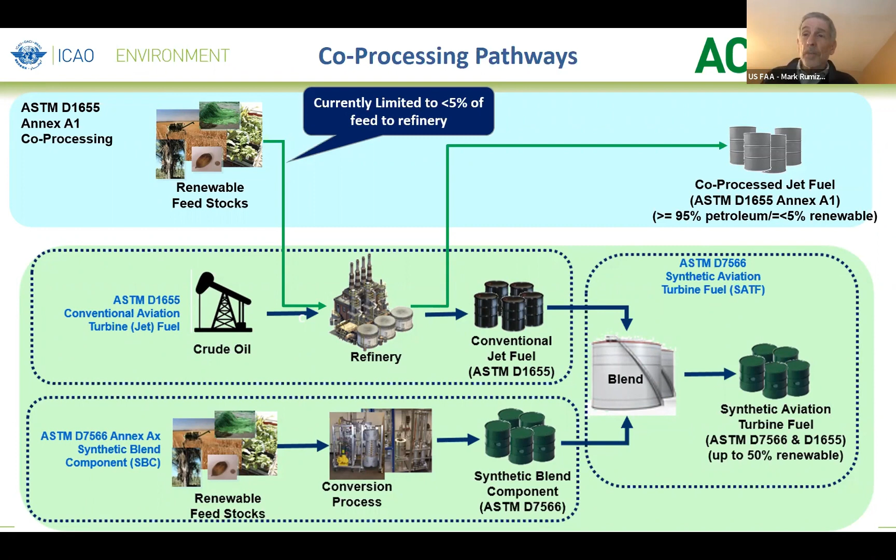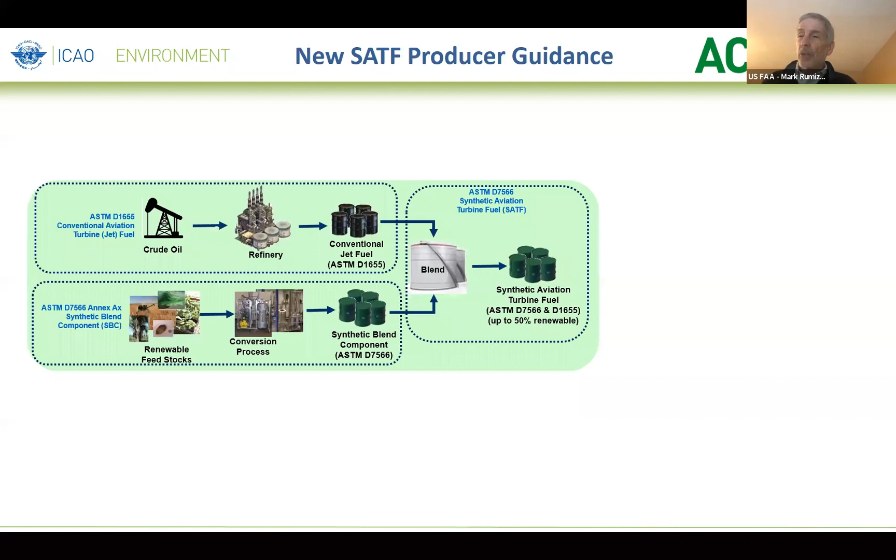Just a quick slide. Let me check my time here. I'm over time by 2 minutes, I'm sorry. Just real quickly, I mentioned this earlier.

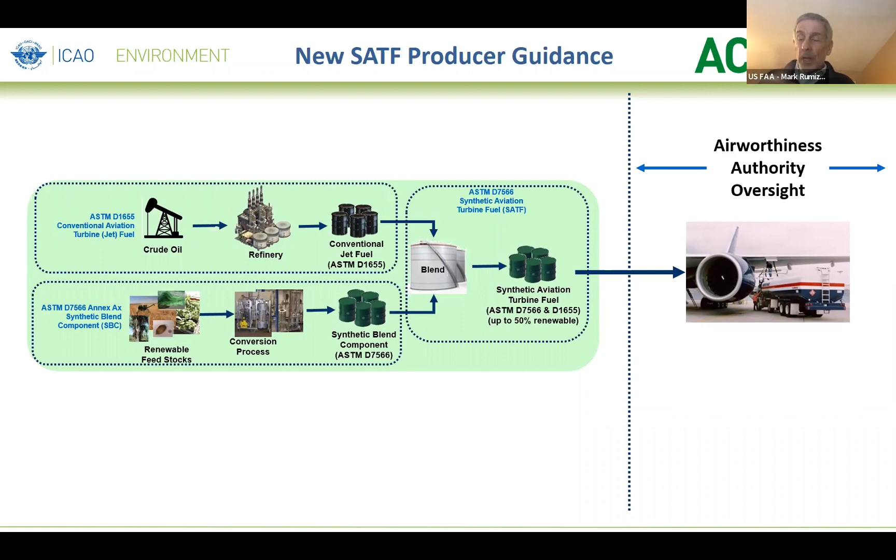I talked about it earlier that the FAA, EASA, ANAC, Transport Canada, JCAB, they focus on the airline. They walk up to the airline and say, are you using the fuel that Boeing, Airbus, Embraer says you're supposed to use?

As I said, the way we've worked out the approval process with SATFs, once it gets into that specification, it is part of what's already been approved. So there's no additional approval for the airline, as long as they adhere to the operating limitations and use only jet A fuel. It gets a little confusing, but no additional approval is required because we do all the work as an industry to conclude and determine that the SATF is jet A fuel, so it's already approved.

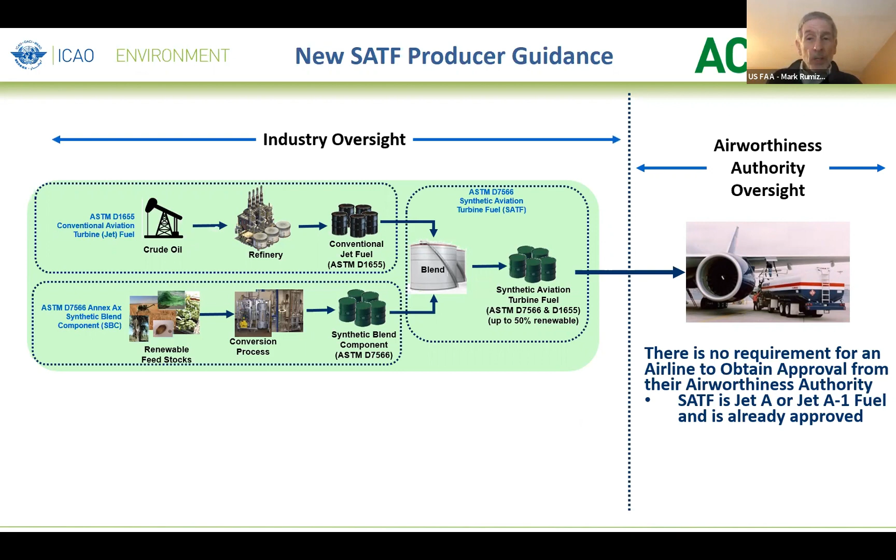But upstream, and I mentioned this at the beginning of the presentation, the whole path that fuel travels is really under industry oversight, because we at the FAA or EASA don't get involved. We don't go talk to ExxonMobil or Shell or Neste or Total in France. We don't audit them, or have any regulatory oversight over them. It's all under the oversight of industry.

And it's evolved—you've got to understand this has evolved over 70 years. We've been using jet fuel, and it's evolved because we have very big companies making a lot of this fuel. There's a lot of focus on safety and controlling it to the specifications, and everybody recognizes how important this is, especially with aviation fuel, for safety.

So it's worked. Think about it—we move 90 billion gallons of jet fuel a year globally, 25 billion gallons in the US alone. Think of how many airplane flights all of you have taken. Have you ever worried about the fuel they were putting in the airplane? Think of how fast they have to move the fuel and fuel the airplane, and there's nobody there checking it when they're putting it in.

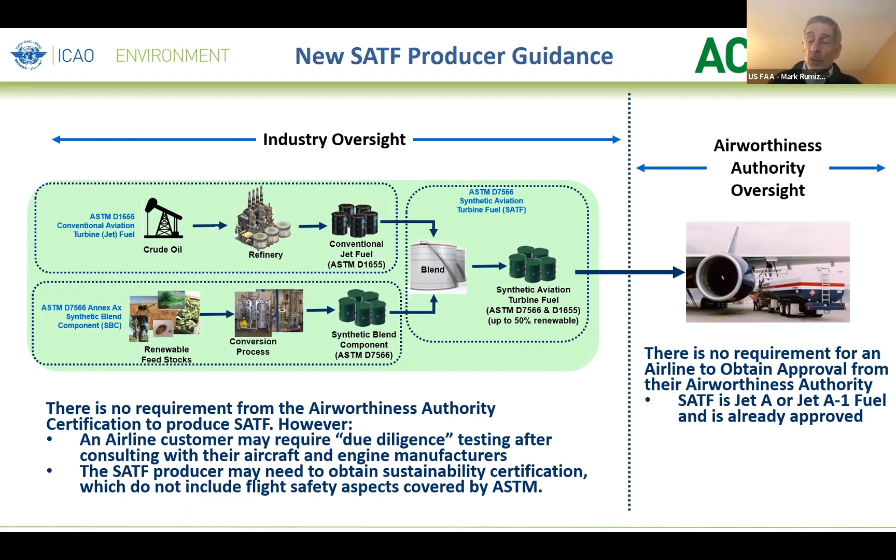The reason for that is we have all these upstream quality control procedures and standards in place that everybody adheres to. And the final comment is, because of that, that's why we worked the approval of SATFs and SAF into this existing structure and procedures we have. That's the whole concept here with drop-in fuel—working into the existing infrastructure we have, and it'll be safe because we know it works.

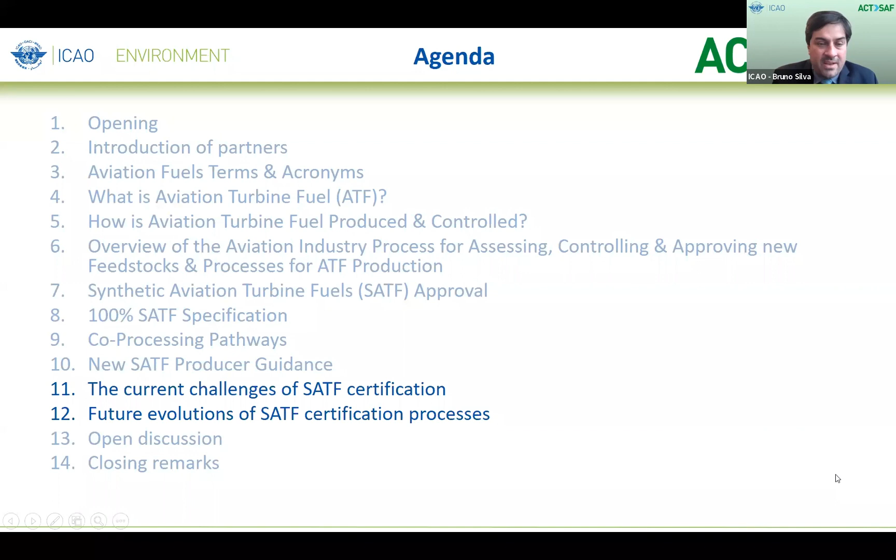Thank you very much for giving me the opportunity to present our vision. I'm Nicolas Jeuland from SAFRAN, a fellow fuel expert. I've got a little less experience than my previous colleague—I've been working in the field of fuel for something like 20 years, previously in the oil industry and then at SAFRAN, which is an engine and fuel system manufacturer.

I will just make a small presentation as a conclusion of all that has already been presented, in order to show you that the certification process of SAF, as you've seen it, is very efficient and very safe. We can say, okay, we already have pathways that are certified, we have a system that is working very well, so now everything is good, we don't have to change anything.

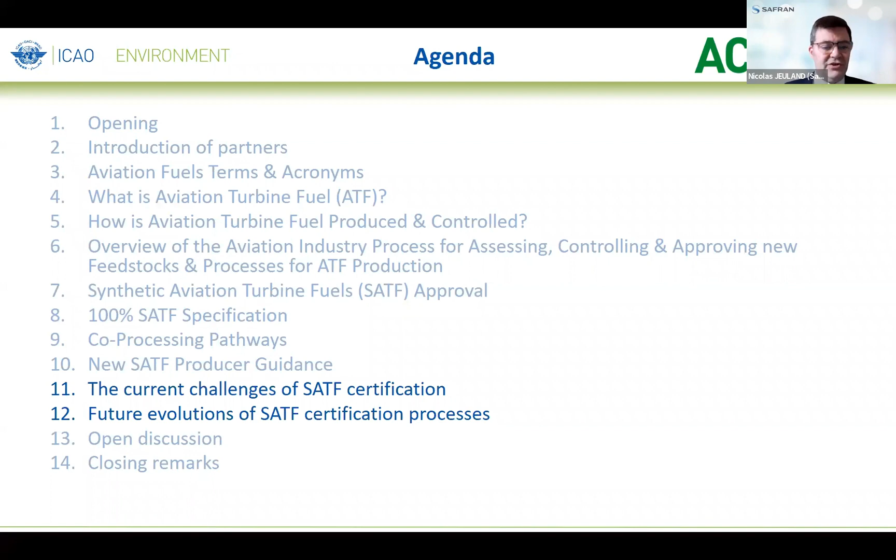I will just show you that some improvements are still needed, and that we have some improvement pathways and some work still being done in order to certify new pathways, to go to 100% SAF, and to increase the efficiency of the certification process. So if we go to the next slide, please.

First of all, a very important thing is that when we look at the ICAO long-term aspirational goals that have been accepted in late 2022, we see several scenarios that have been put on the table, and all these scenarios rely on a massive ramp-up of SAF. Such a ramp-up really implies an increase of the production of SAF, an increase of the use of SAF everywhere in the world, so that the certification process is key in order to allow these scenarios to be reached.

Such ramp-up implies, first of all, the continuous qualification of new SAF pathways. We could say we already have 7 pathways certified, so it's sufficient, let's stay like that. But clearly no, we have to certify new pathways in order to be able to use any feedstock present in any part of the world, and to transform it efficiently into a fuel that can be used in any aircraft in this country. So enlarging the scope of the biomass or feedstock that can be used to produce SAF is key to allow this deployment in any country in the world.

And the second implication of such ramp-up is that we will have to go to high blending ratios, and we'll have to go up to 100% compatibility of all aircraft with the fuel. We could say, okay, why are we speaking about 100%? Because we see its long-term vision, and we are today at something like less than 0.5%. So why are we already speaking about 100%?

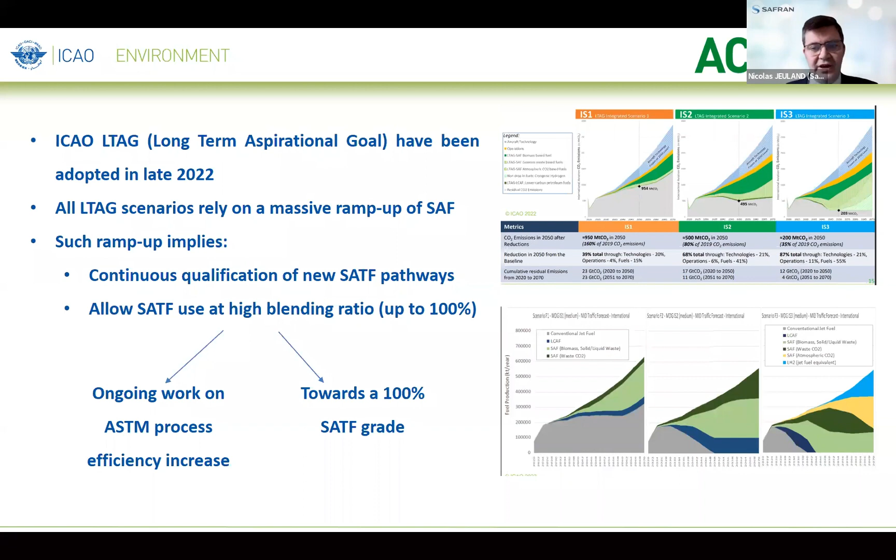That's why we have 2 main work streams currently being done to go to that target. First of all, we have to go towards this 100% grade, and I'll say a few words about that just after. The second point is, if we want to certify new pathways, we all know that it's complex and difficult work. So we can work on increasing the efficiency of this ASTM process, and that's why I'll just show you on the next slide.

You can go to the next slide, please. When we speak about increasing the efficiency, previous one please.

If we speak about ASTM process efficiency, once again, and Mark already told that, but it's very important to insist on it, the goal is not to simplify or reduce the requirements. We are asking for a huge volume of data in order to be able to qualify the fuel, to certify that the fuel is fully compatible with all the technology. The goal here, when I speak about ASTM process efficiency, is not to reduce this requirement. It's clearly to increase the efficiency of the process by allowing the fuel producer to more easily reach the final result, in order to show the compatibility of the fuel with the technology.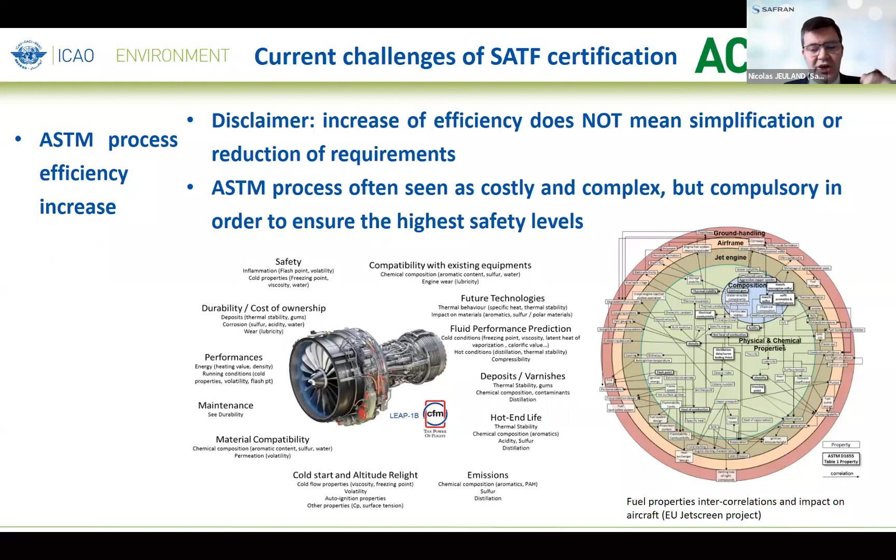So if we go to the next slide, clearly the key of this efficiency increase will be R&T. It will be an increased understanding of the link between the fuel chemical composition and its impact in the aircraft. And here we have two types of projects that we can quote.

In the US, we have the FAA ASCENT National Jet Fuel Combustion Program, for instance, which is dedicated to the impact of the detailed chemical composition of the fuel on all the combustion processes. And I've already quoted that, the EU JetScreen project, which has ended a few years ago, but was also dedicated to the understanding and modeling of all these properties.

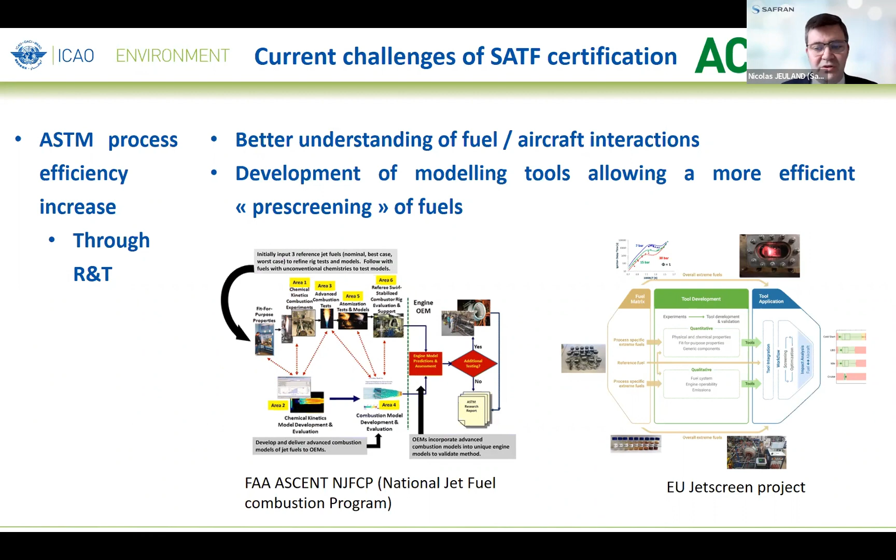And the more we know the link between the chemical composition of the fuel and its impact on all parts of the aircraft, the more efficient we'll be in the certification of new fuels. So that's one point. The second way to increase the efficiency of the ASTM process, shown on the next slide, is to make this clearinghouse.

And Mark already told that. We are working a lot on the building of this clearinghouse at UK level, at EU level. But once again, as Mark already stated, and it's also important, the goal of the clearinghouse is not to replace ASTM. We have this ASTM process that is efficient, that is accepted by everyone, that has shown its efficiency, that has shown that it is really safe.

So we have strictly no need to create new systems in order to compete with ASTM. The goal is more to put in the same table, in the same place, all the experts from different places of the world, in order to act as a guide, to act as expert advice to the producer, in order to help them, in order to support them, in order to provide them with financing, in order to provide them with test facilities to make all the characterization of the fuel.

And then being able to bring that to ASTM level with increased efficiency, with research reports that are very concrete, very solid, in order to go more easily through the various steps of validation by OEMs, then by the airworthiness certification system. So clearly, the clearinghouse at various places in the world, once again, is not dedicated to replace ASTM, but is dedicated to support the producer in their work towards certification through the ASTM process.

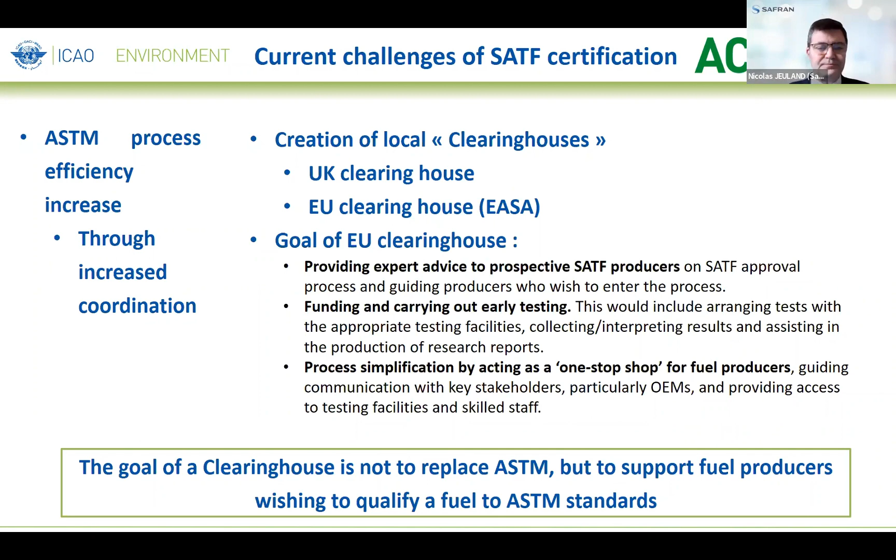If we go to the next slide, I just wanted to come back once again on the 100%. I will show you just another way. The message is the same as the one brought by Mark. Just as I speak at the end of the presentation, he spoke about pizza. I will speak about dessert with fruits, but the message is the same.

We have this limit of 50% incorporation. It's really linked to fleet compatibility. With this 50% limitation and with all the limitations we've put through the ASTM process, we are sure that all the SAF pathways are fully compatible with all aircraft all over the world without any limitation. And that's key in the deployment of this SAF. Then if we want to go to 100%, we have two ways.

The first one, as we say, is to stay within this drop-in system, which means that we will formulate the fuel, put all the molecules in order to have a fuel that is fully compatible with all the existing fleets. It's clearly the most easy way in terms of deployment, and the most easy way to ensure compatibility of all aircraft by defining a specific chemical composition compatible with all aircraft.

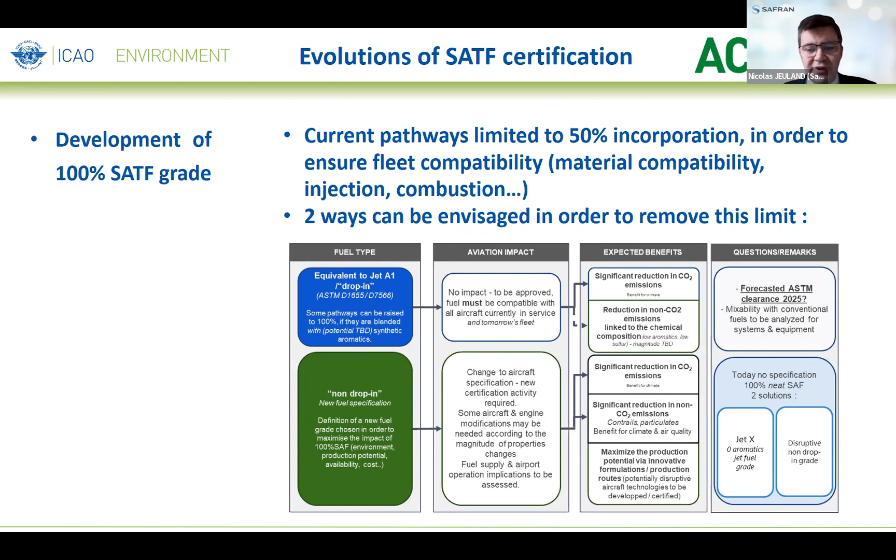Okay, so you have the fruit after the pizza. Here are the fruits. Clearly, what we wanted to show on this slide has been prepared by Goran Andac from GE and Stephen Kremer from Pratt & Whitney. What we want to show here is that we have the pathways that have already been certified for 50%.

The full compatibility is the red apple. It's perfectly good for the health of the aircraft. Some pathways are, I would say, close to that, close to a jet fuel, so it's a green apple. It's close to an apple, but not very, very healthy. So we can eat it, but it's not very healthy. And some others are very different from the apple.

It's the banana. So what we see is that some pathways are red apples even at 100%. That's what Mark just showed you a few minutes ago.

We can imagine this kind of pathway going up to 100%, and that's why I've said that we will come to a specification of 100% drop-in fuel in a few years. This is because we already have a pathway that we think can be compatible with this target. So the work will be, I won't say easy, but at least we have a very good direction to describe this specification. Other pathways clearly are not intended to go to 100% because their chemical composition is really different, so typically there is no chance that they go to 100%.

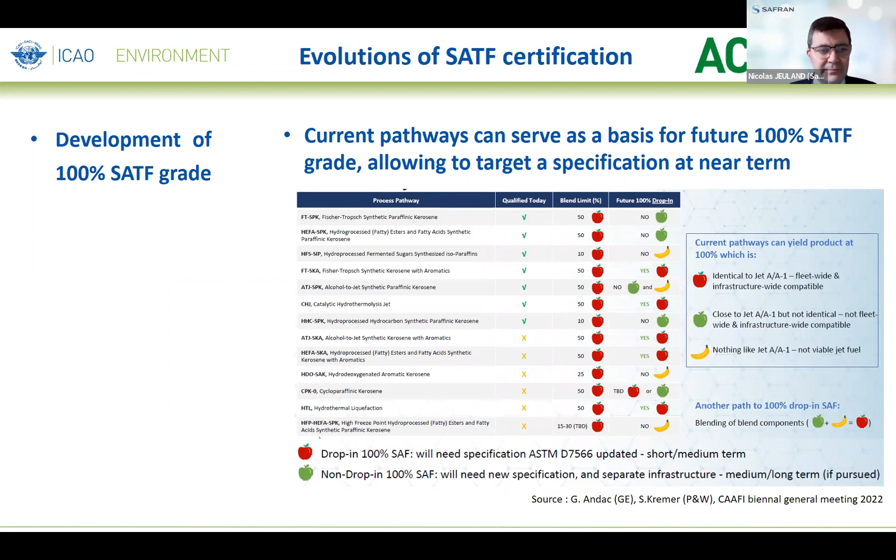So that's what I said just a few minutes ago. We have two task forces already created at ASTM level. The first one is the drop-in pathways, chaired by Goran Andac from GE, with vice chair Mark from FAA. We also have a task force dedicated to what we call Jet X or similar, dedicated to evaluating the potential of removing the 50% limit on an already certified pathway.

On a longer term, we could also discuss a totally disruptive non-drop-in fuel, meaning if we go to non-drop-in fuel compatible only with specific aircraft, could we potentially discuss radically new grades outside typical jet fuel composition? But once again, we are at very low TRL with very low maturity. It's only discussion we are having today, to say what would be the benefits of going to such disruptive pathways versus all the difficulties in terms of deployment, production ramp up, etc.

If we go to the next slide.

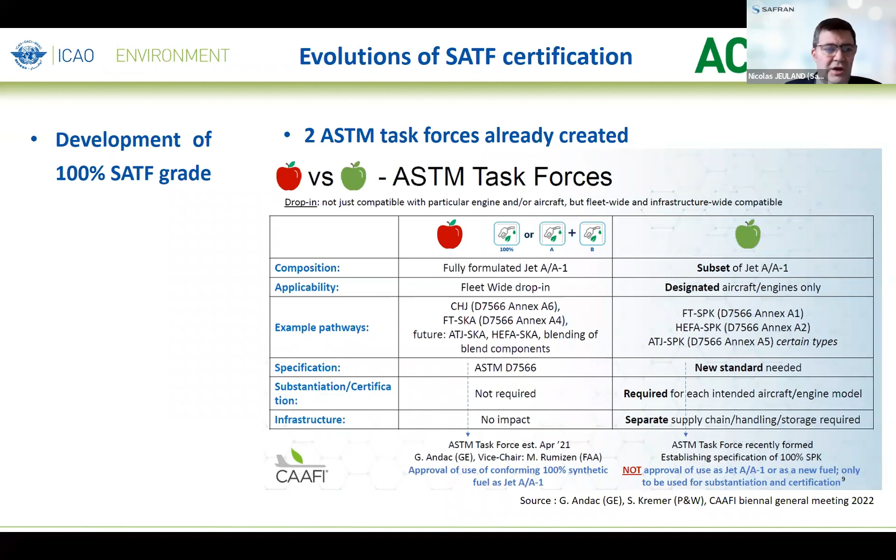So to conclude, once again, we have a certification process that is very safe, it has been demonstrated to be very safe. All the work today is to go to more efficiency by better understanding the fuel's impact on the aircraft, and by increasing, on one side, the number of certified pathways to enlarge the type of feedstock used to produce SAF, and on the other side, to go to 100%, first with the drop-in pathway, and then in the longer term by studying other non-drop-in pathways, first by assessing their potential versus the difficulties involved.

So thank you, and if you have any questions, please don't hesitate to reach myself, Mark, or anyone else here today.

Thanks, Nicolas, that's a great presentation too. I also like the fruit analogy there. In the end, we had very clear explanations of this blending and 100% SAF issue, right? Ross started with the very technical mass spectrum, then we went to the pizza, and now the fruits. It's been really great, and I think it's now very clear to everyone. So again, thank you very much for your presentations. This was very, very enlightening for everyone involved here.